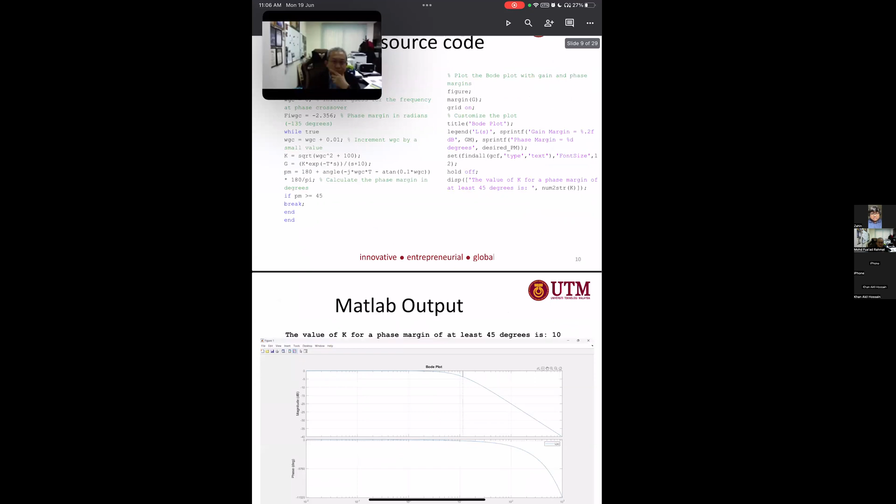So this is our group, and Rishad is going to present the first two. Akil is going to present the following ones, and I'm going to present the last one, 10.10. So we will begin with Rishad.

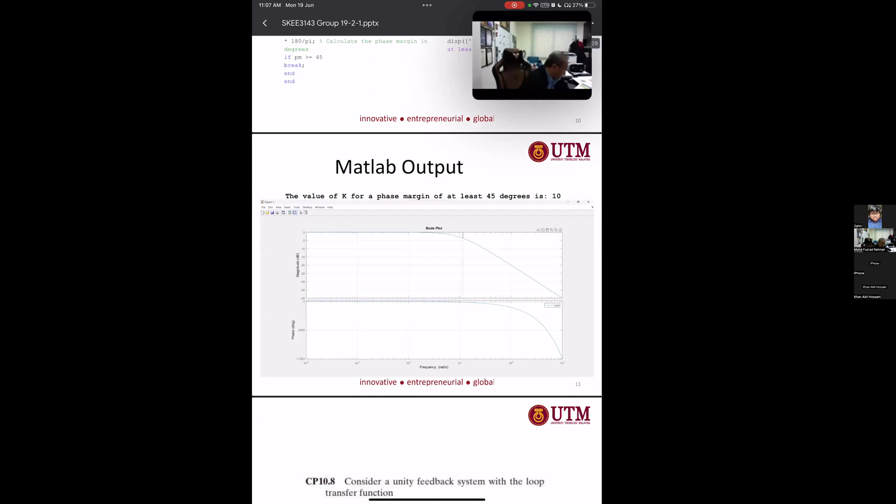Can you move my picture to the left or to the right? Or close it? Okay. Bismillah. So now we will wait for Rishad to present the first two. Rashad bhai. Actually, my PC crashed again. So, doctor, can I present from here? Yeah, sure. Okay. So, Assalamu alaikum, doctor.

We are from group 19, and our task was assignment 6. This is our first question. Here we are given a feedback control system, a transfer function, and we need to verify that the gain margin is infinity and the phase margin is 9.8 degrees. We know that for calculating the phase margin of the system, at the gain crossover frequency the magnitude of the gain of the system is equal to 1.

So we replace S in the transfer function with j omega. The first and second lines are the phase margin equation, minus tan inverse 2 omega divided by 15 minus omega squared. In the next line, we calculate the value for j omega and set the magnitude equal to 1. From that equation, we calculate omega as 12.8 rad per second, and by putting that value into the phase margin equation, we get a phase margin of 9.8.

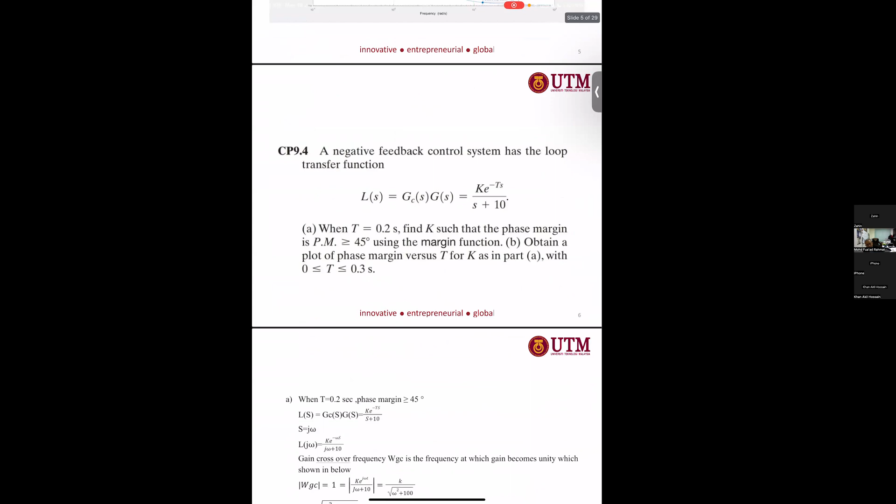Here we replace s in our transfer function with j omega, and from that we calculate the magnitude, giving one equation: k equals root over omega squared plus 100. Using the phase margin equation, we got another equation: minus omega t minus tan inverse 0.1 omega gc, where omega gc is the gain crossover frequency.

So as we have the value t is equal to 0.2 second, we just put the value here, and for the phase margin, as given, the phase margin is greater than or equal to 45. So from that equation we also got the crossover frequency for phase margin, which is minus 2.356 radians. So we got two equations, and by solving these two equations we also got another omega; the previous one was for the phase margin, and the last one is our omega. So by using those values we get the value for k is equal to 13.15.

And for the second part also, from the first part we got the equation for the phase margin, and we just put the value here, and by using this value we made a graph.

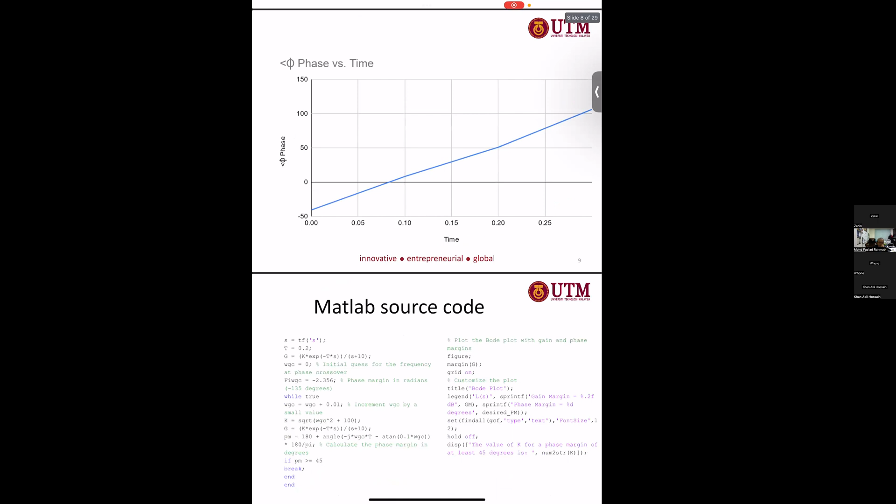Okay, so for the MATLAB, the provided code is used to calculate the gain and phase margin for the given transfer function. So here we define our transfer function by using the GS parameter, and we also initialize our values by using WGC and FLWGC, and in the while loop we increase the value by 0.01 and recalculate the transfer function G of s using the updated k and WGC. Also, it calculates the phase margin in degrees based on the shift at WGC.

And after the loop, the code plots both plots by using the functions GC, GS, and also the margin function. It includes the gain margin and phase margin lines in the plot, and then finally the code displays the calculated value of the gain that results in a phase margin of at least 45 degrees. So we can observe the phase versus time. Our observation is that in the phase versus time graph, it skews at different places. So I'm passing the next slide to my brother Akhil to present.

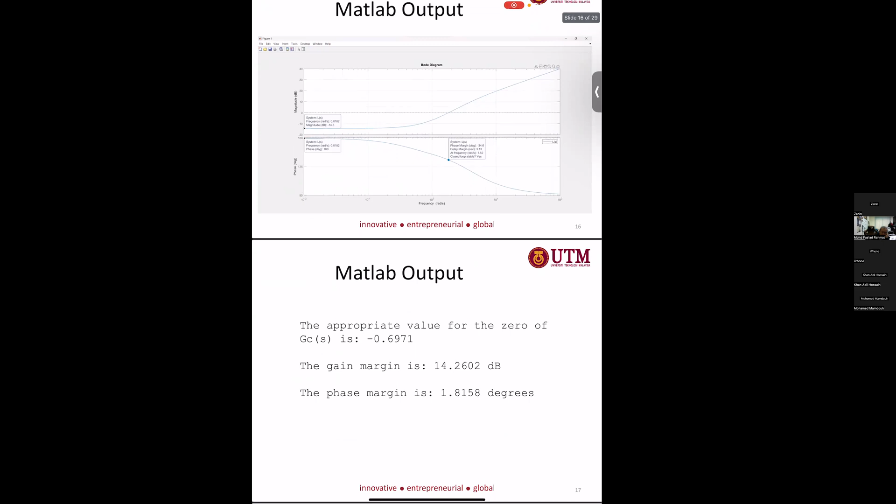I hope that's acceptable. As for the gain margin and phase margin, we have the outputs: gain margin is 14.26 decibels and phase margin is negative 34.61 degrees.

For gain margin, we get the gain crossover frequency at 0 radians per second. And for phase crossover frequency, we get 1.82 radians per second.

So moving on to our next question. Consider a circuit with the transfer function G(S) equal to the equation given, where we have a capacitor and...

Hello. Yes, we can hear you.

So for this equation, we have a circuit for the transfer function which has a capacitor and resistance. So we need to plot the frequency response.

Moving on to the manual solution, we just need to plot G(S) and nothing else. So it's simple enough.

We just replace the values of C and R in the equation, then substitute S with J omega, and then use the magnitude value to get the magnitude and the phase angle.

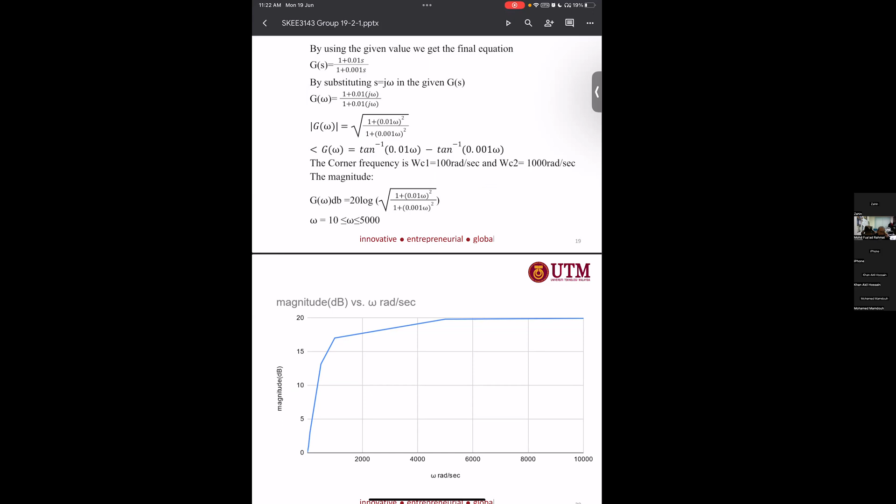For the corner frequencies, omega C1 and omega C2 are 100 radians per second and 1000 radians per second. We use these magnitudes, and by using the magnitude equation, we can get the solution for omega ranging from 10 up to 5000.

So for the next slide, we have the magnitude and the frequency response, and the phase and the frequency response.

For the magnitude, we start from 0 and go up to 5000. It keeps increasing, but after that it stabilizes, and that's the value for the magnitude.

And for phase, that's the curve. The peak phase is around 50 degrees.

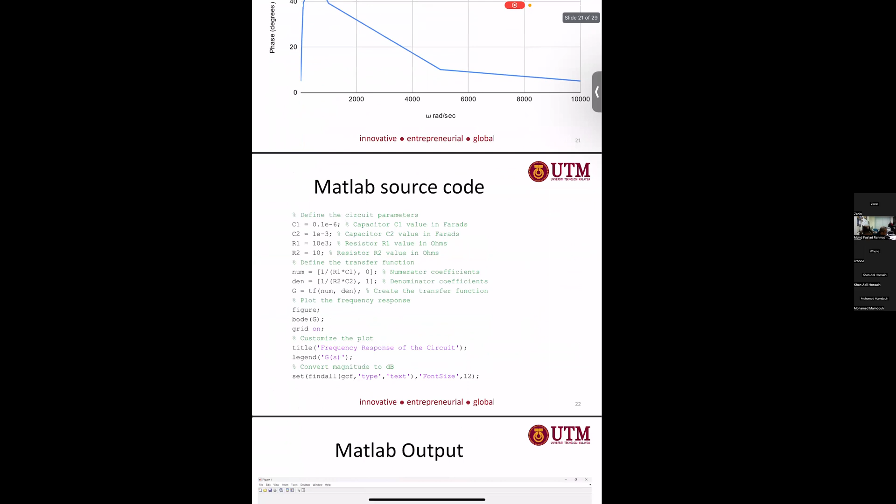Moving on is the MATLAB source code. We just need to plot, so we define the capacitor and resistor values as C1, C2, R1, R2.

Then we use the numerator and denominator coefficients and the transfer function TF, setting G equal to TF of numerator and denominator. Then we plot with G, turn on the grid, and fix the titles and so on.

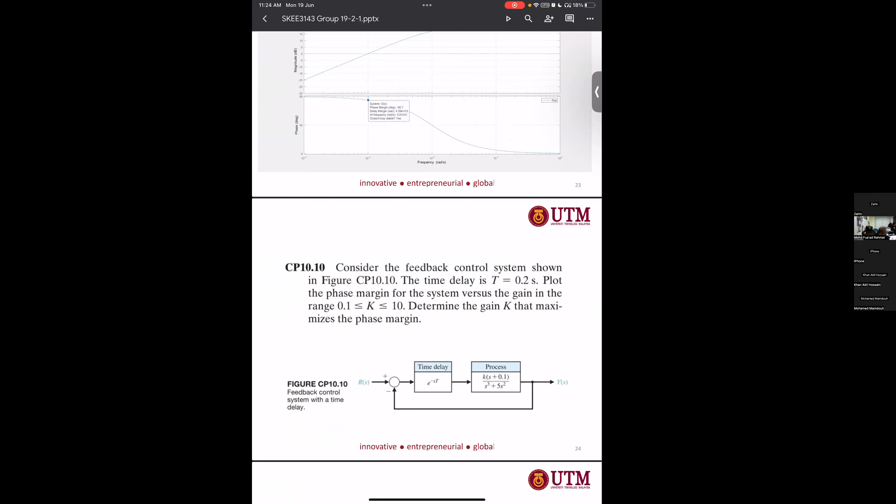The question goes: consider the feedback control system shown in figure 10.10. The time delay is t equals 0.2 second. Plot the phase margin for the system versus the gain in the range 0.1 to 10. Determine the K that maximizes the phase margin.

In the manual solution, the transfer function of the system is given, and then we replace S with J omega. When we replace it, we separate the magnitude and the phase of the loop transfer function.

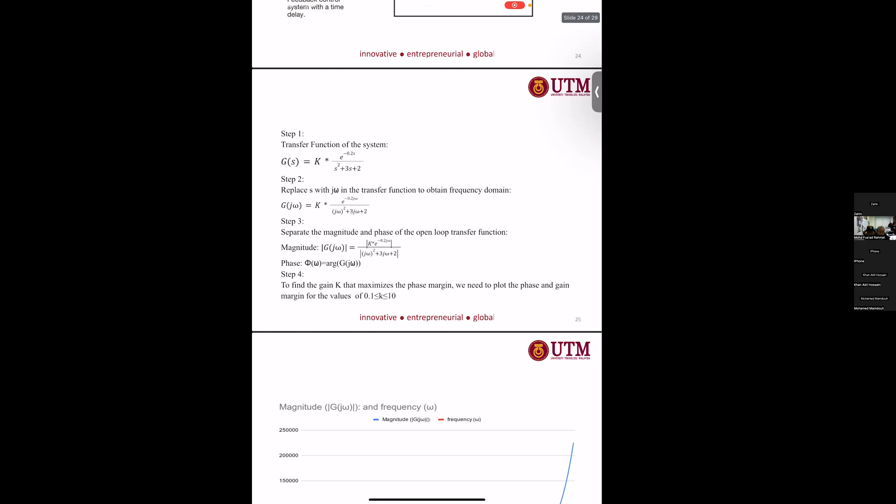And then to find the K that maximizes the phase margin, we need to plot the phase and gain margin for the values 0.1 to 10.

Professor, would you like to see the Excel file? Just browse through, okay, be quick. All right, just follow the slide.

So this is the magnitude and frequency curve, and this is the phase and frequency curve. So let me explain the MATLAB code. Why does the curve begin with phase as -1, -2, -3? It's supposed to be in degrees.

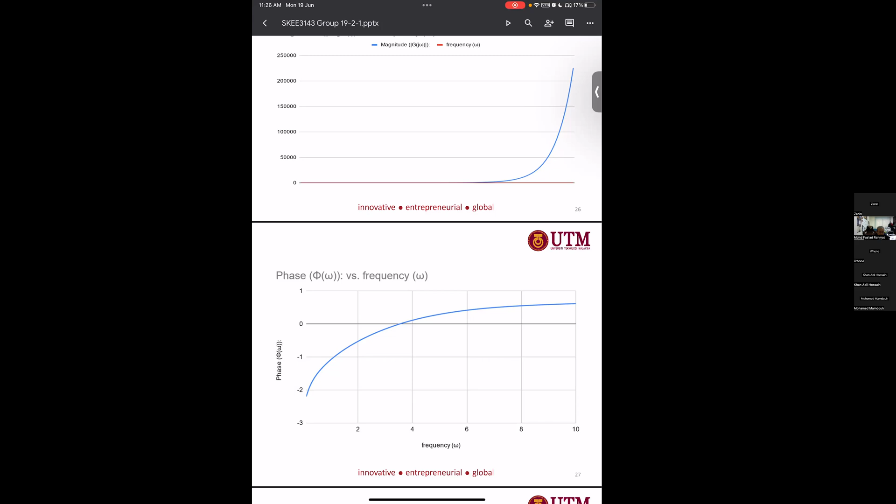I think all your Excel file is wrong because the magnitude should be decibel versus frequency, and phase should be degree versus frequency. Who plotted this? Was it Akil? I don't know.

You better check again. Yeah doctor, I plotted this one. Maybe I made a mistake. It's wrong, all your Excel is wrong. It's supposed to be magnitude in decibel versus frequency and degree versus frequency. Yes doctor, maybe I made a mistake. You take note of that.

Let me explain the MATLAB source code. The code begins with defining a range of values for the gain K in the variable k values. It starts from 0.1 and increases by 0.1 and goes up to 10.

Two variables, max phase margin and optimal gain, are initialized to store the maximum phase margin found so far and the corresponding optimal gain. The code enters a loop that iterates over each value in the k value array.

Within the loop, the current value of k is assigned to the variable k for calculation. The time delay Ts, numerator coefficient num, and the denominator coefficients den of the transfer function are also defined. The transfer function g is created using the numerator and denominator coefficients along with the specific time delay.

Next, the feedback. Should I move on to the output, or do I keep explaining the code? Next.

All right, the feedback transfer function h is set to 1, representing unity feedback. The closed loop transfer function t is calculated by applying feedback to the transfer function g with the feedback transfer function h. The code checks the stability of the closed loop system by analyzing its step response.

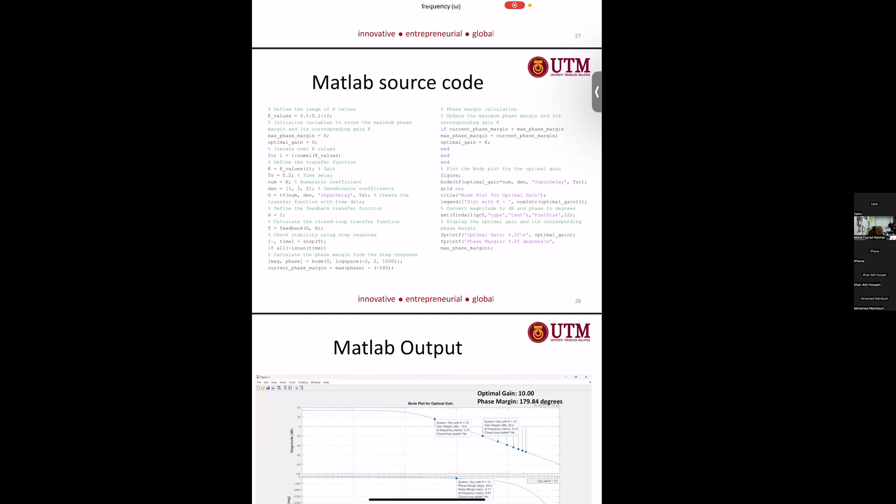The Bode plot is then generated for the transfer function with the optimal gain value, allowing visualization of the system's frequency response, which we can see in the output.

The Bode plot is then generated for the transfer function with the optimal gain value, allowing visualization of the system's frequency response. Display settings are adjusted to show the magnitude in decibels and the phase in degrees. Finally, the optimal gain value and its corresponding phase margin are displayed using fprintf statements.

Okay, finish? Yes professor. Okay, take note there. Your all Excel file is wrong. Replot again: magnitude in decibel, degree versus frequency.

I don't see any flowchart in your assignment. You show the program, but no flowchart. And then no Simulink, I don't see any Simulink file here.

So I'll give you 1 week to repair your slide and submit by this Saturday. Thank you professor for the extension, doctor. This Saturday, thank you professor. Thank you, the rest is wrong so you have to take note.

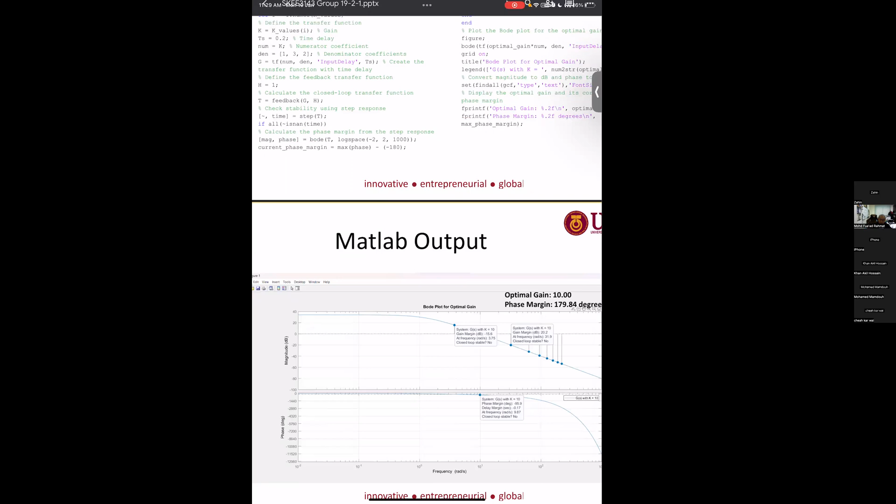Rashad, what is the comment? Yes doctor, what is the comment? My comment? Your comment. What, you should know very well. Number 1, all Excel file is wrong, redo again. Number 2, yes doctor.

No flowchart in the report and slide. Number 3 is Simulink, no Simulink. Your Excel file all is wrong, so you have to repair again. Yes doctor, my annotation is wrong. Your assignment is failed, because information is wrong.

Okay, you may exit now. Okay doctor, we'll fix. Okay, okay, let the brothers enter. Thank you professor. Thank you. Assalamualaikum. Assalam.

Okay Mamdo, get in. Muhammad Mamdo, Osama Mamun. Yes doctor. Chia Kawi, wait, we have the time delay because... Asha, you can go out.

Asha, leave meeting, I don't know where Osama is. I WhatsApped him but he's not responding. Asha, leave meeting because other people want to share. So doctor, currently is it group 18 or group 17? You wait Chia, I will call you. Okay okay, because this Bangladesh group has a lot of time delay, okay. Pasha, bye, leave meeting.

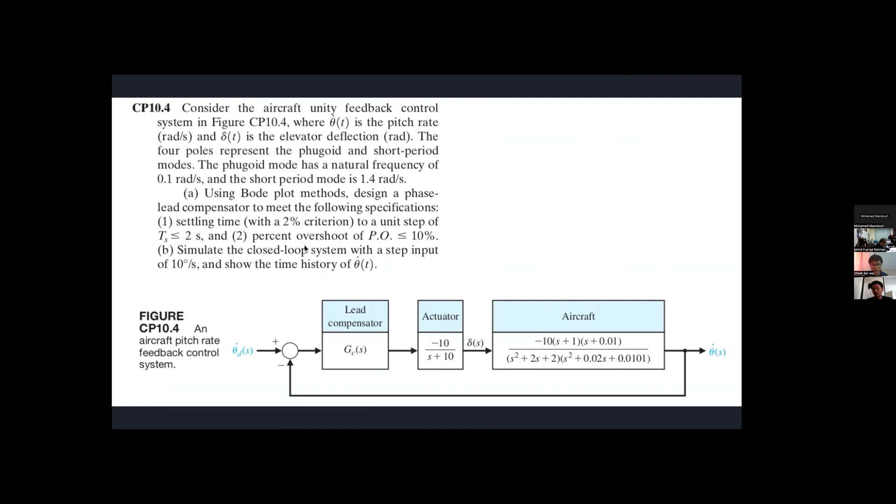Okay, proceed, proceed. So we start from the first question. This question asks us using the Bode plot method to design the phase-lead compensator with a settling time of 2 seconds and percentage overshoot of 10%.

So my first step is to determine the gain, then the target phase margin. After that I obtain the gain margin and phase margin from the Bode plot. Then I calculate the additional phase, and from the additional phase I can determine the value of beta. Then from the Bode plot I can get the value of the gain crossover frequency.

So with the value of beta and the frequency, we can calculate ZC and PC. Here I calculate the gain assuming the ESS is less than 2%. Since this is the unit step response, ESS equals 1 over 1 plus KP. After the calculation, the K is around equivalent to 10.

Then from the graph of damping ratio over the overshoot percentage, I can get the target damping ratio. Then from the graph of phase margin against the damping ratio, I can get the target phase margin, which is 58.5 degrees.

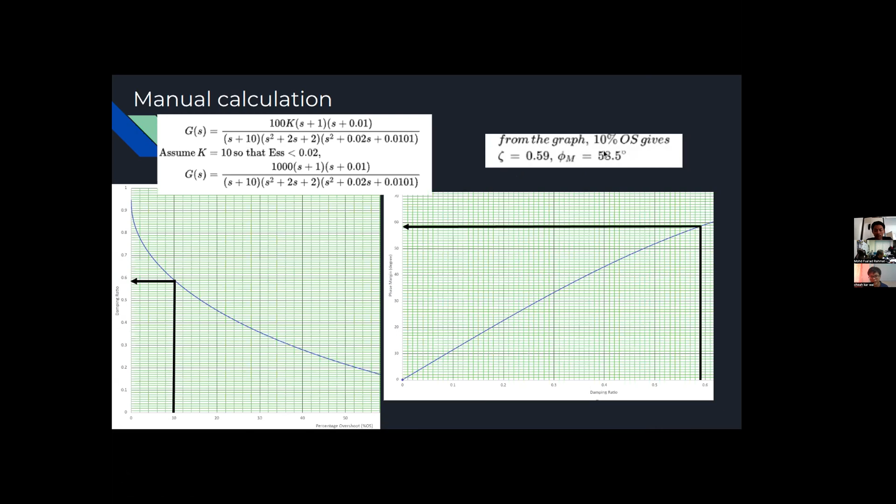So here is the uncompensated Bode plot. From the Bode plot we can get the original gain margin and phase margin - where the frequency cuts at 0 dB is the phase margin, and where the phase cuts at 180 is the gain margin. After calculation, the phase margin is around negative 34 degrees and the gain margin is 18 dB.

So we calculate the additional phase, which is 100.2 degrees. Then by using the formula, we can get beta of 0.012.

From the beta, we can get the maximum magnitude of the phase lead compensator, which is 19.208 dB. Then from the Bode plot it's around 20 radians per second.

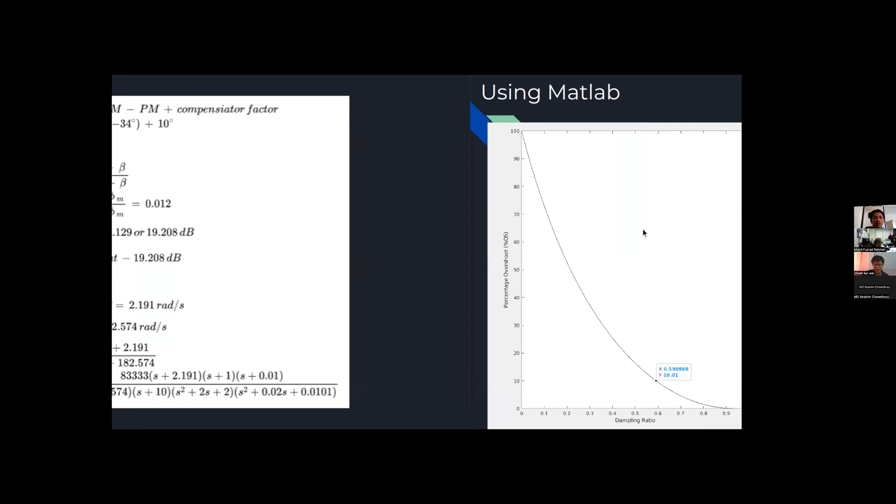So now it's processed using MATLAB to prove my answer. In MATLAB I also plot the graph of percentage overshoot against damping ratio, and the phase margin against damping ratio graph. From the graph, the damping ratio and phase margin is almost equivalent to what I found from the graph in Excel.

Same, yes, here is phase margin 58.5 and damping ratio of 0.59. What I get from Excel is the same.

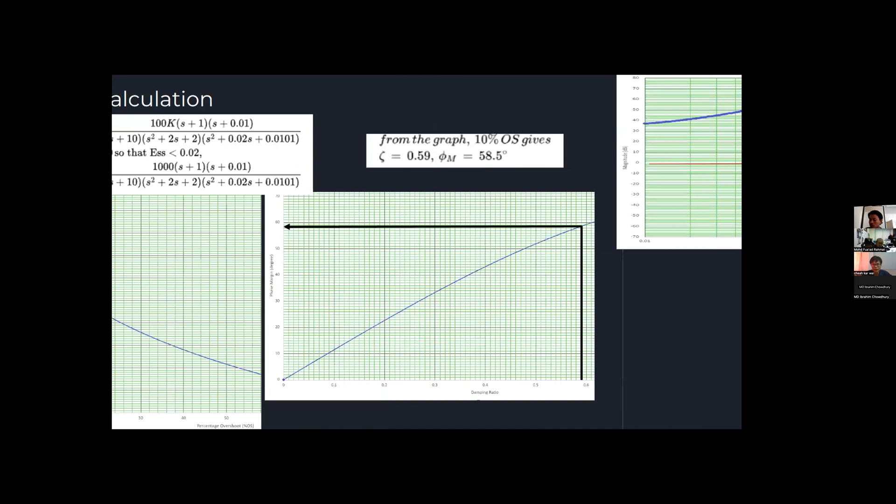So from the Bode plot, by using MATLAB I get the phase margin and gain margin. Then put the value from MATLAB and calculate until I get this value. Why plus 34? Oh here, the phase margin is minus 34. Minus minus becomes plus.

Okay, betul? Razin, betul tak? Betul lah tu. Kau kat mana ah, yang sayup-sayup? Bilik tu tu.

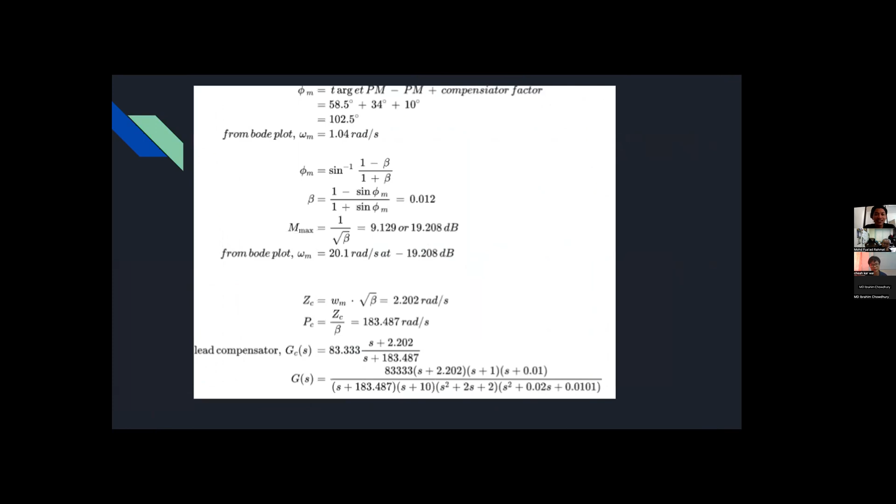Okay, okay. So I can see it. Is this here?

It's almost the same. So, okay, here comes the second section of the question: we need to plot the time response of 10. Okay, step response of 10. So the first graph is the uncompensated system, the middle one is the compensated system using manual calculation, and the third one is the compensated using the MATLAB calculation.

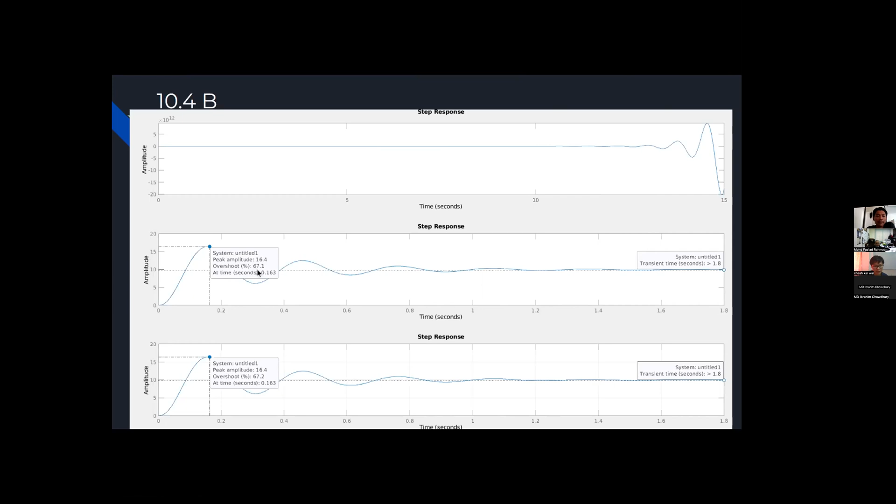So from the bottom two graphs, we can see that the transient time is almost at 2 seconds, and the overshoot is 67%. Discussion. So from this question, it seems that the transfer function is successfully reduced to 2 seconds, but not sure why the overshoot did not reach the target, which is 20% overshoot.

All right. Next. Okay, next. Be quick. Next is Razin. Yes, okay, present. So Razin, do you want to share your slide or just continue my slide? You want to present? No. I mean, this is your presentation part. So the slide, I continue sharing screen? Okay, share. Okay. You cakap je, dia control.

Okay, question 10.6 is about the lag compensator: we need to design a lag compensator using the root locus to meet the following specifications. The first specification is steady state error must be less than 10% for the step input, the second is phase margin must be greater than 45 degrees, and the last is settling time, 2% criterion, less than or equal to 5 for the step input.

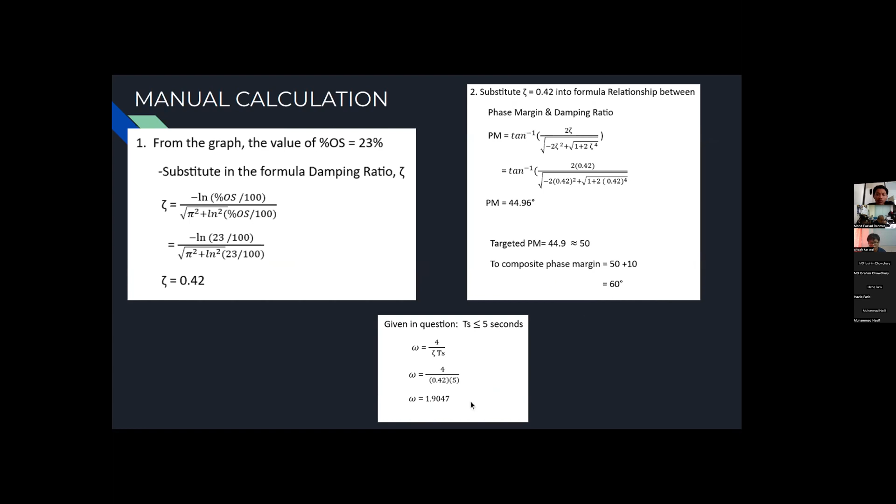Next, for the manual calculation, we substitute the percentage overshoot equal to 23%, and we get the same value as the graphical method. Then we substitute the damping ratio into the formula relating phase margin and damping ratio, and we get the phase margin equal to 44.96. Then we compensate the phase margin and get 60 degrees. And for the frequency, we get 1.9047 to run the coding.

Okay, for the steady state, the question states that steady state error must be less than 10%. We calculate using the formula of steady state error type 0, which is steady state error equal to 1/(1 + Kp), giving Kp equal to 9. The Kp compensated must be greater than 9, so we choose Kp compensated equal to 10 to include inside the MATLAB code.

For the Kp uncompensated, we get it from the root locus, and the value is 5.18 when the damping ratio equals 0.42. So we can calculate the ratio for the compensator, and we get 1.737.

So from the locus, we can assume the value for the ZC to create the equation for the compensator. So we must assume ZC equal to 0.5 because the first pole is near to the origin. Then we substitute into the ratio equation, and we will get the value for the PC. And then we can create the compensator equation, which is GC equal to 10 (S plus 0.5) over (S plus 0.2879).

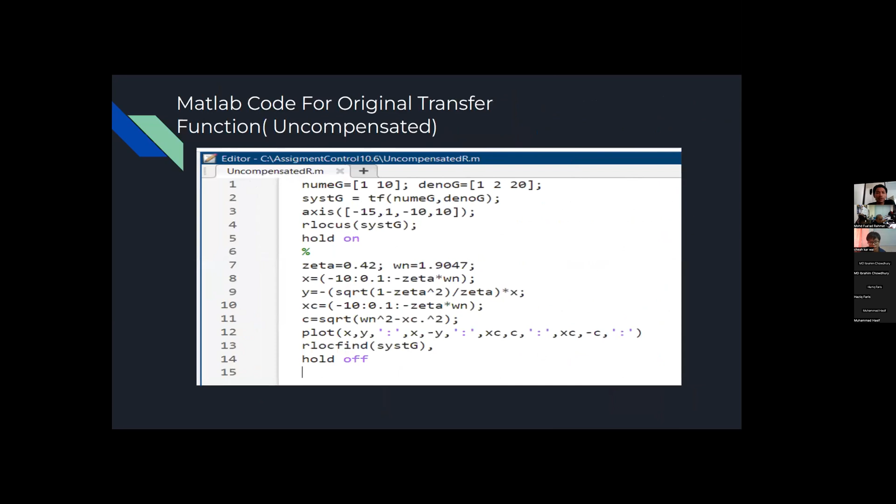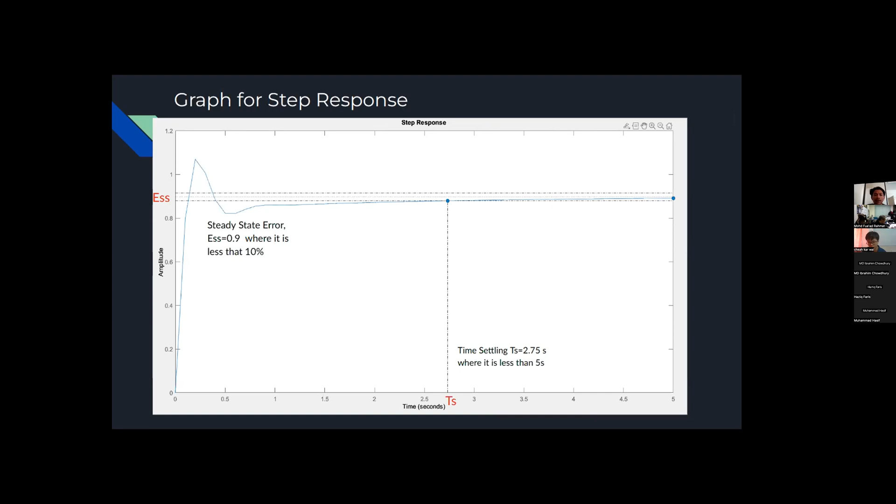Okay. For discussion, a lag compensator can improve stability and performance. It enhances stability by reducing oscillation and preventing system failure. From the assignment, we can see that the compensator increases the damping, reduces oscillation behavior, and improves the transient response. Settling time is also improved, allowing the system to reach the desired value more quickly. The lag compensator increases the phase margin and gain margin, reducing the risk of instability and making the system more stable. However, the need for the compensator depends on the system specification, characteristics, and performance required.

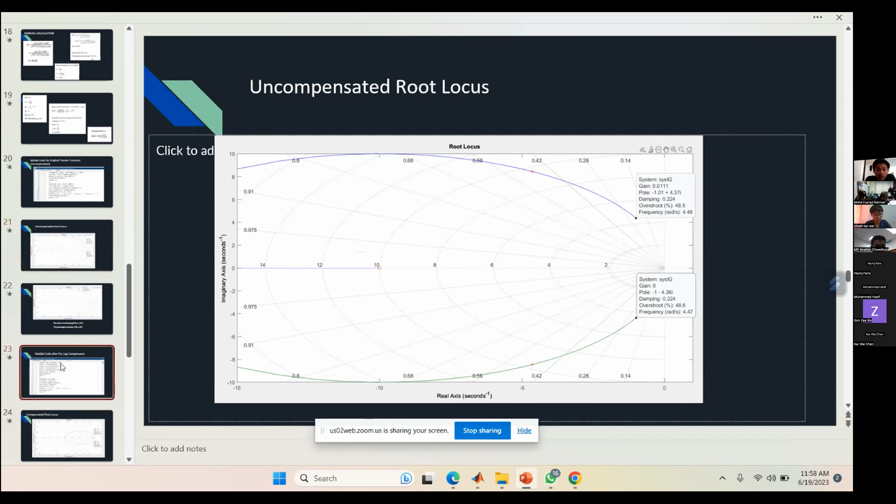And this is the code for the second coding for our compensated root locus. Here also we did the same according to the numerator and the denominator, and multiplied the transfer function to find the second numerator for finding the transfer function from open loop to closed loop system, and here we also use the zeta and omega and the same values.

And finally, when we plot the graph, this also remains the same. The root locus damping ratio and the overshoot also remain the same as the previous one. And in both parts there are no changes in the frequency response also, so it remains the same, 4.47.

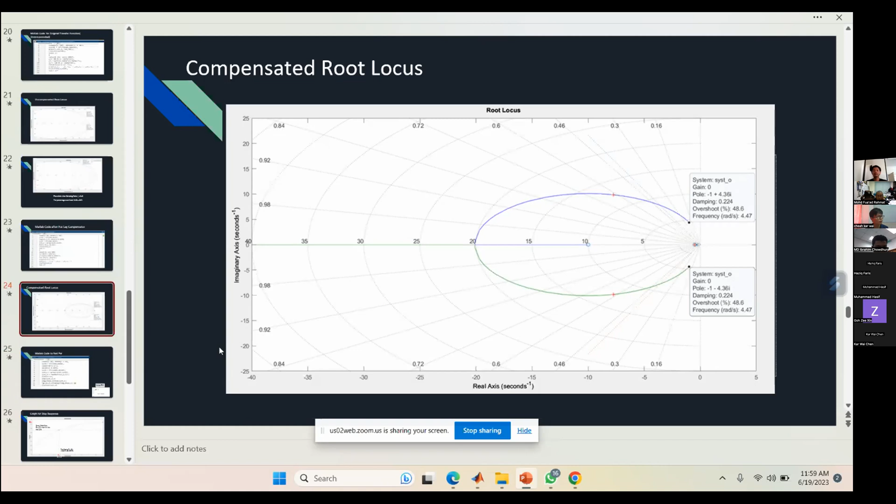And this is the code for question C to find the phase margin. Everything remains the same as the previous code. We just plot the phase, magnitude, phase margin and omega to find the Bode plot and the unit step response. And here we use the SISO tool, single input and single output tool, to plot the phase margin and the step response also.

So here we got a steady state error of 0.9; as given in the question, it should be less than 10%. It remains 0.9. And when we plot the graph, the settling time is 1.88 seconds, which is less than the given 5 seconds from the question. And when we plot the Bode plot, we find that the phase margin is 62.3 degrees at a frequency of 13.7 radians per second.

Another thing, doctor, when we plot the phase magnitude and phase margin, we didn't get through the 180 degrees, and we only have a limitation until -135.

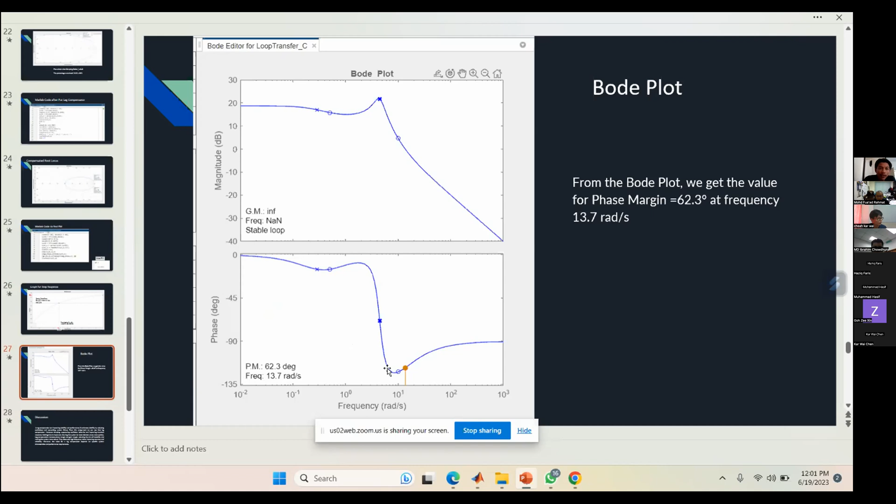You're late. No, Doctor, we already submitted, but we keyed in the wrong group number. Huh? We keyed in the wrong group number. Why? We wrote 14, not 16. So 14 hasn't submitted yet. I don't know, Doctor. Sorry. Okay, so wait, Doctor.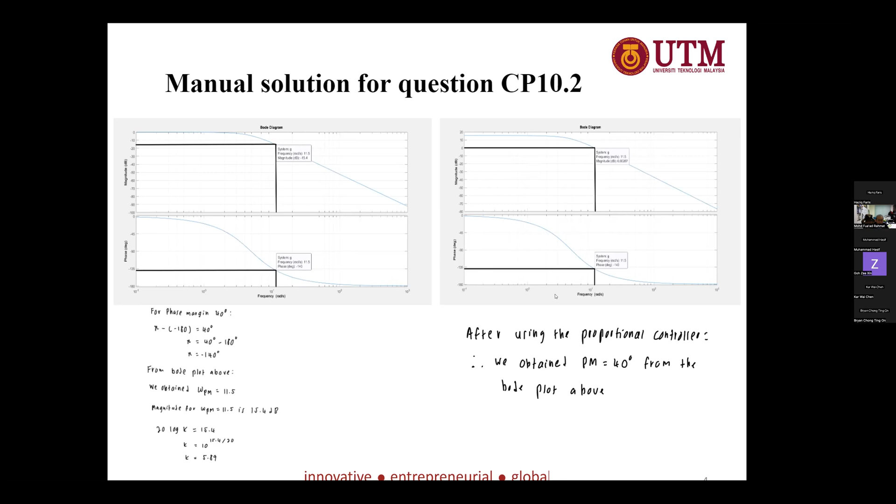Dah? Hello, dah? Okay. No. We continue to question 3.

So we continue to question 3. For question 3, we had a hard time solving the question, to be honest. So we just did our own calculation. Hopefully it satisfies you, Doctor. So for the... pardon, Doctor? Last minute. Oh yeah.

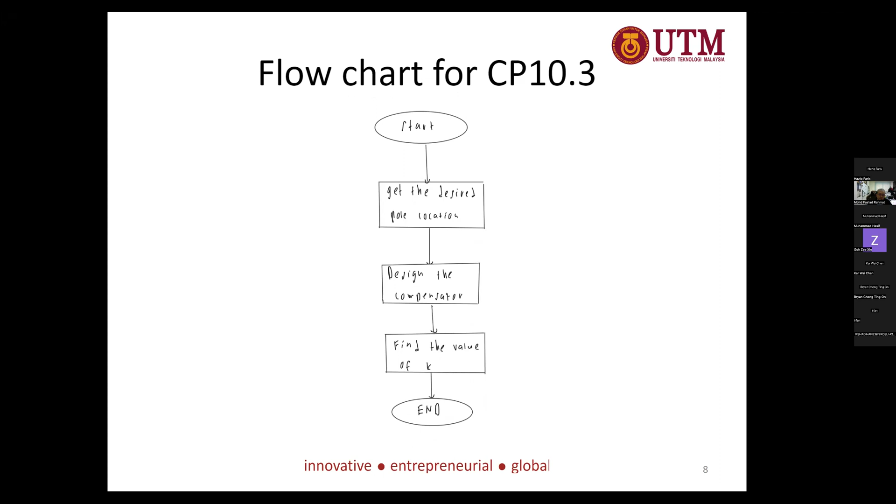And this is the flowchart for question 3. First we get the desired pole location, which we assume is -4, then we design the compensator, and lastly we find the value of k, where we assume the value of k is 100. Okay, this is the MATLAB source code for question 1 and question 2.

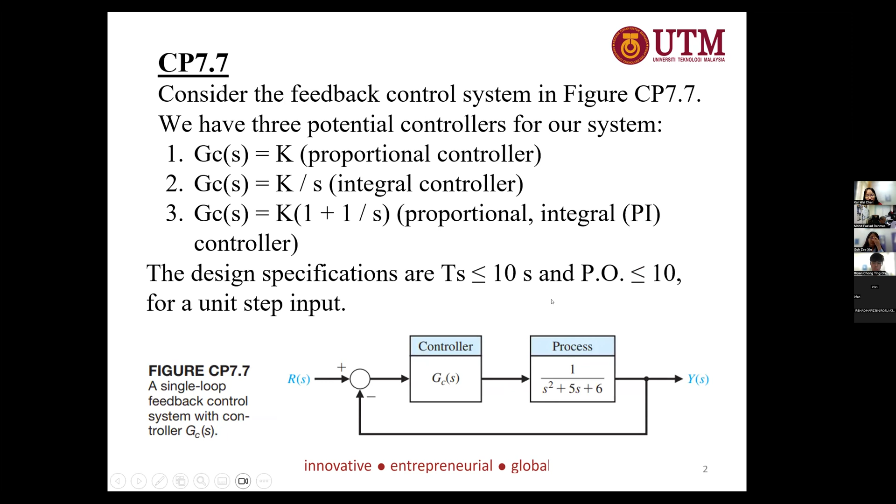There are 5 questions in this question. For the first one, we need to develop a root locus for K from 0 to infinity and determine the value of K so that the design specifications, the above two, are satisfied. For part B, we repeat the same thing using the integral controller, and the third time using the PI controller. For question D, we need to plot A, B, C in terms of transient response, which is the unit step response for the closed loop system. And for E, we need to compare and contrast these 3 controllers obtained in parts A to C.

Next, this is a flow chart of how we do question 1. We begin with plotting the root locus and determining the theta value. Then we find the range on the real axis, calculate the range of K, check with MATLAB, and check if K is valid with the calculation. If it's not valid, we need to debug again. If it's valid, we check until all 3 controllers are done. If not done, we do this again. Once the 3 controllers are done, we plot all the transient graphs and compare them.

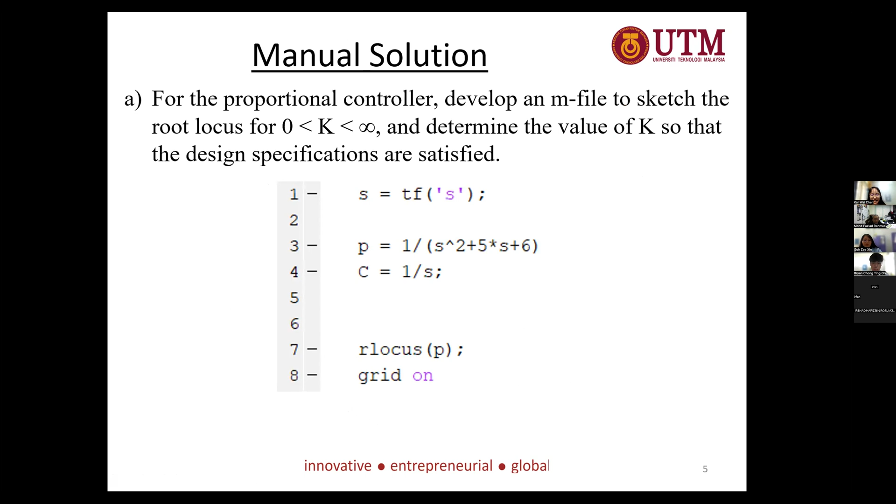For the first question, we are doing the P controller. This is the MATLAB code. Because we cannot draw the root locus by hand, we need to plot it in MATLAB. So the manual solution is the same as MATLAB; we need to plot it. You can see this P, and the P controller is this. Next, this is what we plotted from MATLAB.

Next, there are 2 specifications. The first one is OS less than or equal to 10%. When we draw this, we find that zeta is around 0.591. So if OS is less than or equal to 10%, zeta must be greater or equal to 0.591. Then the theta is less than or equal to 53.77. From the second condition, the TS value: TS is less than or equal to 10. After working on this, we get that the real value must be greater than 0.4.

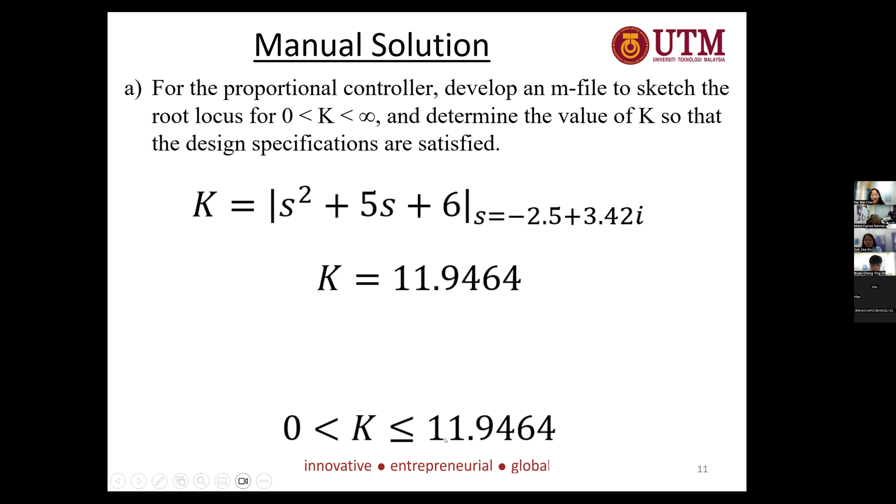Then the second ratio is 0.4. You can see from 0.4, there's no line, so every point here is valid. From our calculation, we take the maximum point here and substitute it in our equation. We find that K is lesser than 11.9464, meaning K is greater than 0 and less than or equal to 11.9464. So this is the manual solution.

And then for the MATLAB solution, it's basically the same, but this time we only take the point. We slide through with the mouse and find that the point here is 11.9. This is the Excel plot, so it's the same thing, meaning K is greater than 0 and less than or equal to 11.9.

So let's look at part B. This time we are doing the integral solution. This one is the MATLAB code, and this is what we draw. Again we have the two conditions; this is the first one, same as part A, giving theta less than or equal to 53.77. This is the condition.

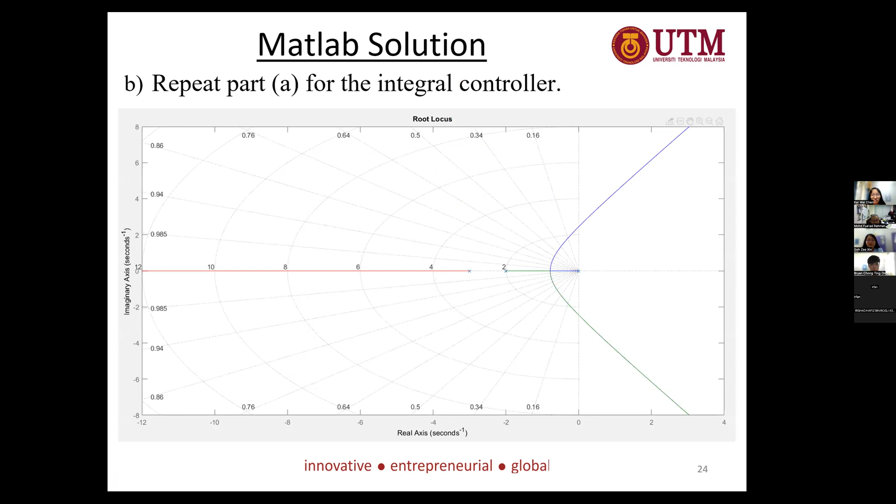So when we plug it all in, K is greater or equal to 1.664 and less than or equal to 4.45. For the MATLAB solution it's the same, but this time we only scroll through with the mouse. This is the Excel plot, and what we get from here is 4.44 and 1.67, so the conclusion is 1.67 to 4.44 for K.

Now for part C, using the integral controller, the MATLAB plot is shown below. This is the same first condition, and then the second condition of 0.4. This time, when 53.77 is drawn, you can see there's a limit from here. Since the 0.4 is at something here, this equation has been cut into half.

And the gain from here is 0, here is infinity, so that means there's a limit here. When we plug in through the equation, we find that the limit is 2.77 until the maximum of 10.04, yeah. So next, when we do the MATLAB solution...

This is the Excel graph. This time we are using the mouse to check. The point shown here is 2.77 until the maximum of 10. So this is our conclusion for the MATLAB.

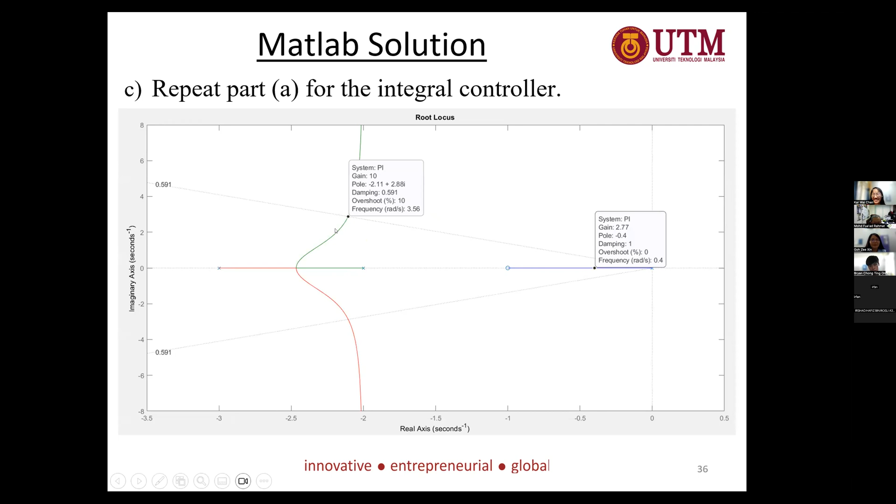Is there any way from the MATLAB code to get the data? For Simulink, yes, but for MATLAB, no.

It's not smart lah. The way you collect the data is not smart.

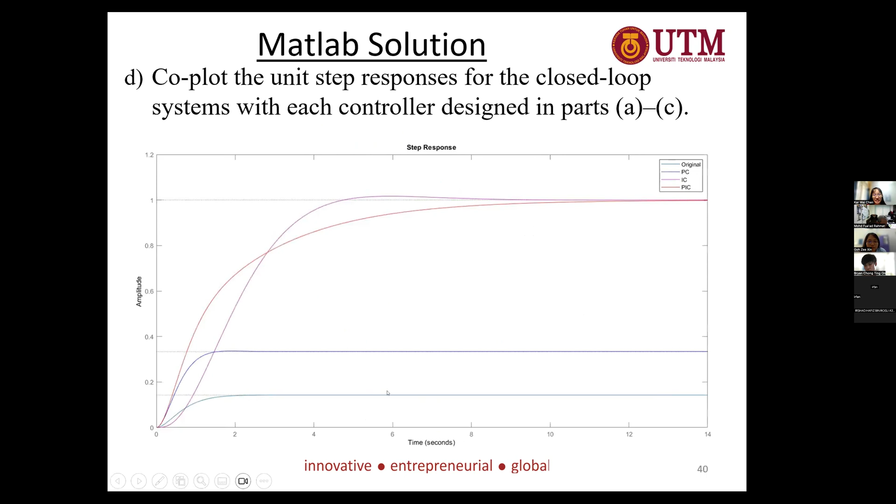Next, this one is the Simulink version, so we basically get the same thing. From the Simulink, we can take the data and then plot it in the Excel file.

So this one is the solution to get the ESS. This is the manual solution. Basically you just find the KP first, and then you find the ESS. This is for the proportional controller, integral controller, and PI controller.

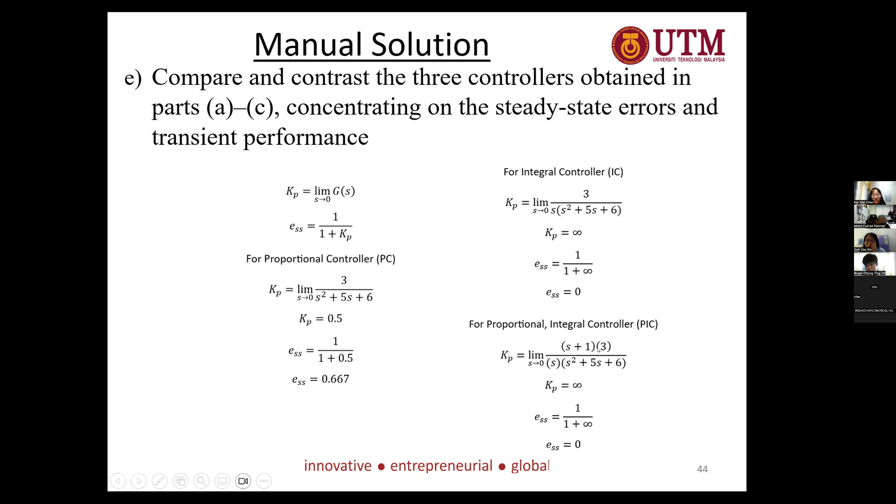Okay, so this is our discussion for question 1. The P controller has the quickest rise time and settling time, but has the highest steady state error. The I controller and PI controller eliminate the steady state error. The I controller has a percentage overshoot.

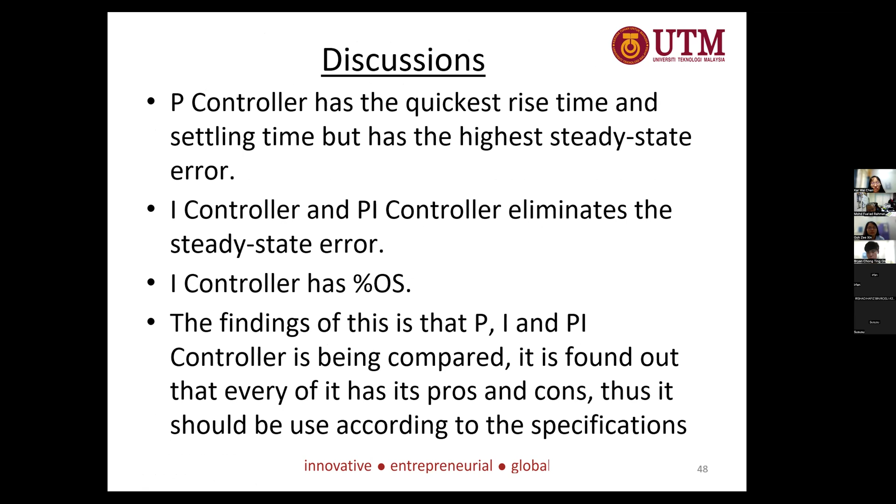The findings are that the P, I and PI controllers were compared, and it's found that each has its pros and cons. Thus it should be used according to its specification. PID might be a better choice as the D controller serves the purpose of minimizing the transient error. The combination of the PID controller can be used to control magnitude and phase problems. And this is the conclusion for question 1.

The effects of applying the P and PI controller have been successfully seen. Okay, next. Next.

Okay, can you hear me? Faster.

Okay, so I will be in charge of CP 7.8. Consider the spacecraft. So we need to find the controller, which is a PD controller. We need to develop a file to find KD over J and KP over J for this question.

And with the settling time TS smaller than or equal to 4 seconds, and the overshoot smaller or equal to 10%, we need to use the 2% criteria to determine the settling time. Next, determine... no, not determine.

Okay, Determine. Basically, this is the flow chart of the question.

First we sub the KP over KD into the equation, and then we find the poles and zeros for the system. Next, we plot the root locus at MATLAB by assuming the damping ratio, the overshoot is 10%. So we find the damping ratio and theta, and then we plot the straight line on the root locus.

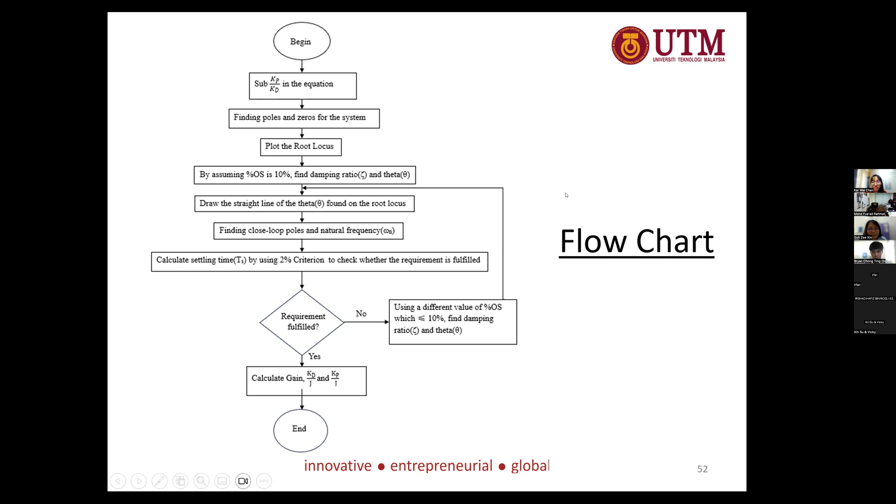So we will sub the 5 into the equation, so we can find the transfer function for it. Then we can know the system type is type 2, the pole is 0 and the zero is -5. So we will assume the percentage overshoot is 10% and 0%.

Previous slide. I think you can access control because Kawai has access the control. Continue. Oh wait, I cannot control.

So first, the percentage overshoot is 10%. So we find the damping ratio from the percentage overshoot and damping ratio graph. We can find the damping ratio is equal to 0.591, so the theta is 54 degrees.

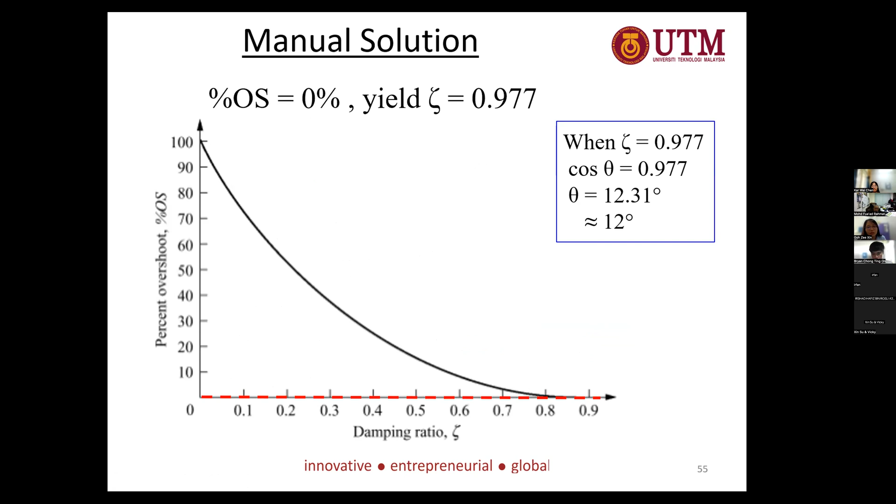Next, we will assume the percentage overshoot is equal to 0%. So the damping ratio is 0.977 and the degree is 12 degrees, which we plot in the root locus.

So this is the root locus. The closed loop pole is -9.55 plus 2.06 J, and the natural frequency is 9.77 radian per second.

By using this closed loop pole, we can also determine the settling time by using the 2% criteria. So the settling time is 0.42, so the requirement is also fulfilled.

Then we can find the gain by using the formula by subbing the closed loop pole into our equation. So we can find the gain, and KD over J and KP over J.

So we can conclude that the KD over J is in between 6.96 and 19.1, and the KP over J is between 34.8 and 95.5.

So this is the MATLAB source code, and N is equal to the numerator, and D means the denominator. So we plot the root locus and plot the zeta line. This is the zeta line, and we use sgrid to plot the zeta line.

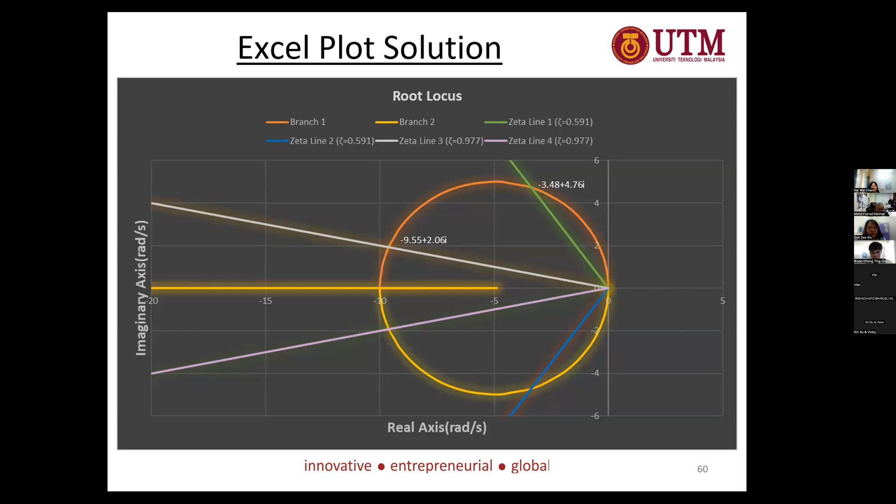This is the Excel plot of the root locus. Then this is the Simulink solution, and this is the Simulink waveform for the time response of the second order system. Then this is the Excel plot from the Simulink which we merged to the Excel.

So for the discussion, we can observe that the KD over J is in between 6.96 and 19.1, and the KP over J is in between 34.8 and 95.5.

So if we want to increase the value of the gain, meaning KD over J and KP over J, we can use a low percentage overshoot. From the root locus, we drag the mouse, and we can see when the overshoot decreases, the closed loop pole will become different.

So when we sub the closed loop pole into the equation, the gain will increase.

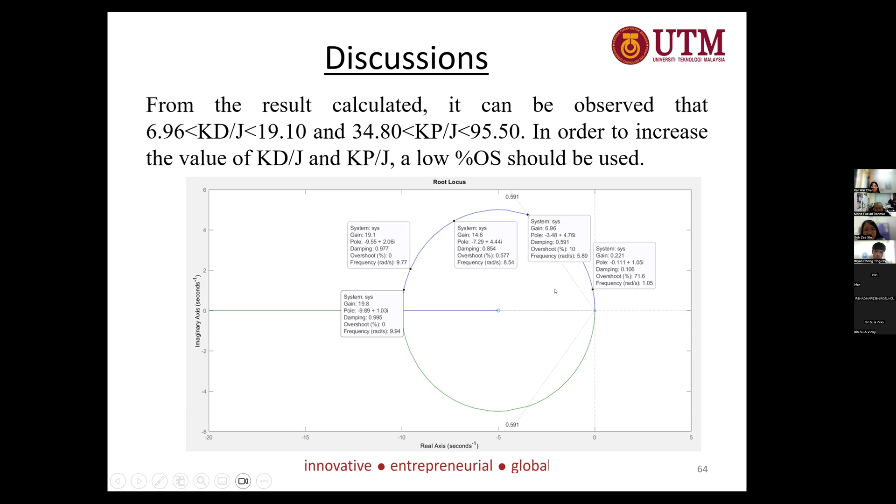Next. So the conclusion is the specification of the PD controller, smaller than 10% overshoot and settling time smaller than 4 seconds, are achieved. So the values of KD over J and KP over J are accepted.

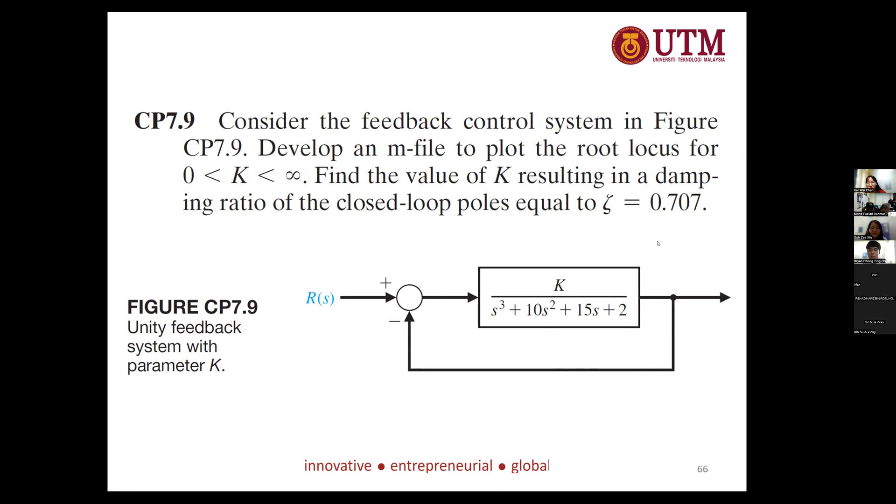Okay, so we have to get the angle of the damping line, the zeta line. So it's 45 degrees. And because I don't have the graph, I just directly use the root locus in MATLAB to get the dominant poles, which is -0.817 ± j0.818.

So in the manual calculation, I sub the dominant poles into the equations to find the gain. Sorry, to sub the dominant poles into the open loop poles equation, the open loop pole length. So we can find that K equals 9.16 from the manual calculation.

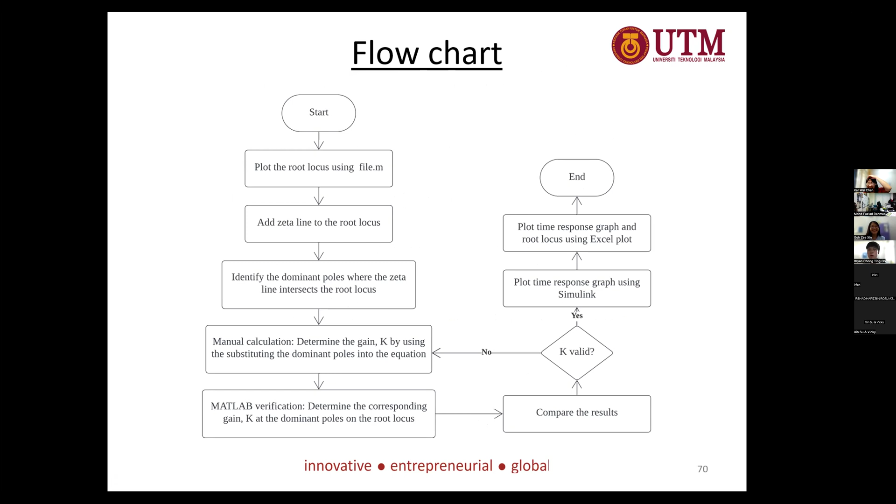So this is the flow chart. We have to plot the root locus using an M-file first. And then we add the zeta line to the root locus, identify dominant poles, and then get the K using manual calculation. Then we verify it using MATLAB and compare the result. If it is not valid, then repeat again. If it is valid, we continue to plot the time response graph using Simulink and Excel plot.

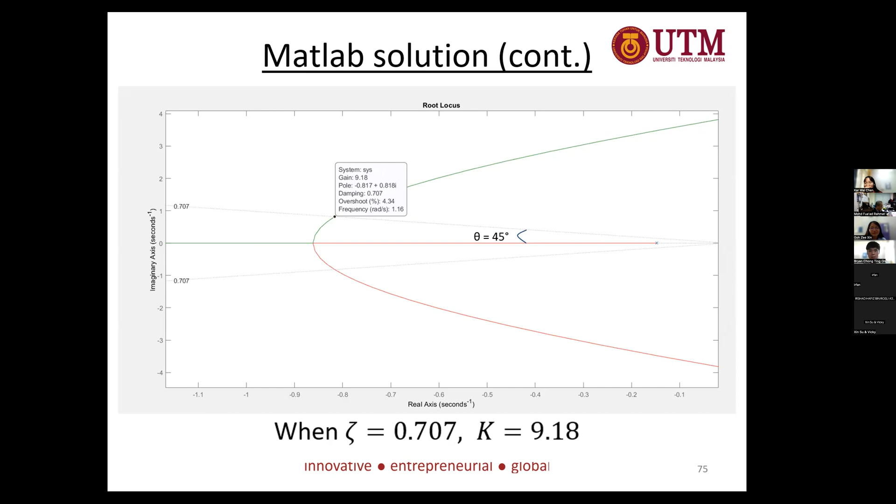So this is the root locus plot with the zeta line, and we can find the values of the dominant poles where the zeta line intersects the root locus. So we can verify that the gain is 9.18 at the dominant poles of -0.817 ± j0.818. Okay, this is the root locus plot in Excel plot.

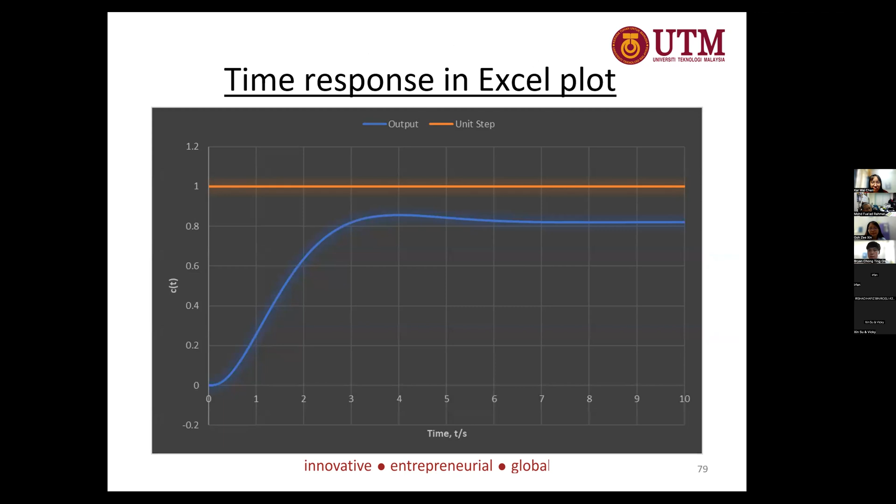So in the discussion, the gain K is verified already, it is acceptable. For the time response graph, you can see that the steady-state error can be improved further. And the transient response, such as the settling time, we can also improve further. So we can come up with a short summary that the PID controller can be used to enhance the overall system performance.

And the conclusions are similar to the discussion. The gain value is identical, it is acceptable. And for the time response, we can further enhance it by using a PID to minimize the steady-state error and to improve the transient response. And that's all from group 15.

Yeah, okay, I have nothing to comment. Very good slides. I want to know, email to me how you transfer from Simulink data to Excel. That's all. Yeah, we have the Excel files included in the zip file. Oh, in the zip, everything is there. Okay. Corresponding person is Brian Chong.

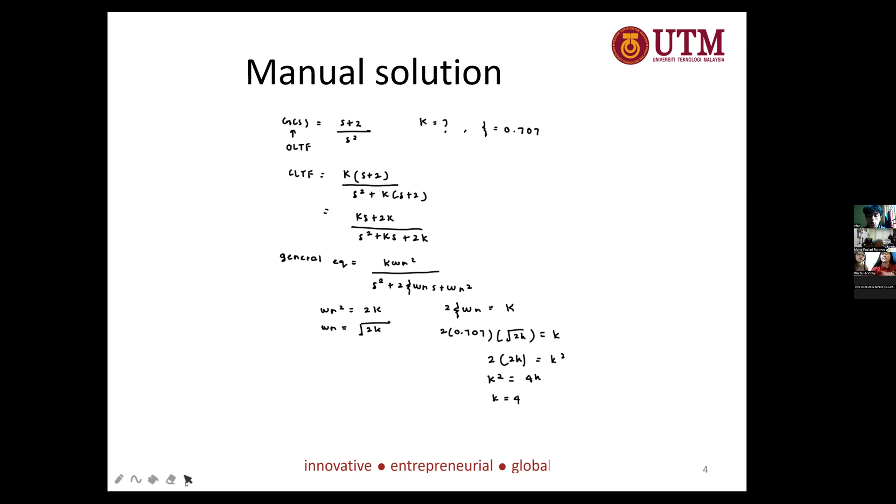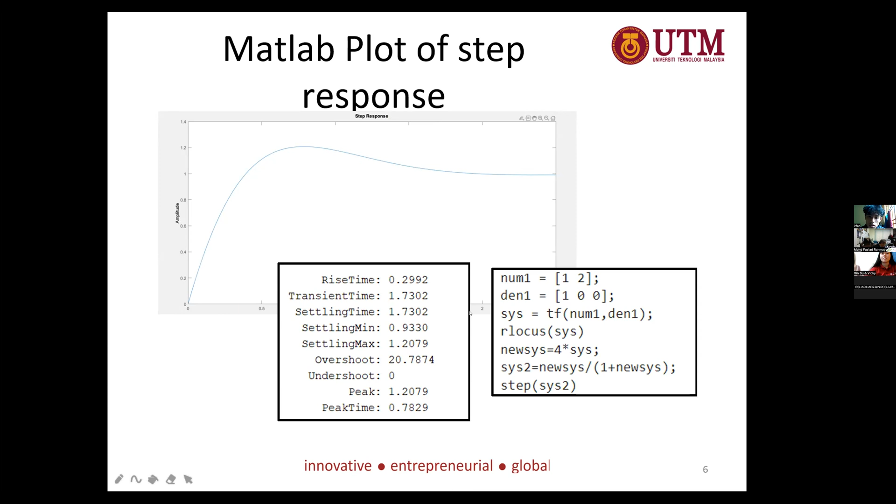As for the step response, this is the source code for the step response, which is the closed loop one with the gain. We also observe the parameters of the step response through the MATLAB code. Next is the Simulink. The Simulink is for the closed loop transfer function with the gain, and we did a comparison between the parameters from Simulink and MATLAB.

Next, this is the flowchart for answering question 1. The first step is manual calculation, then writing the MATLAB code for verification. We move the mouse to find the damping ratio for verification and compare with the calculation. As the values are the same, we proceed to generate the step response of the closed loop system in MATLAB, and implement it in Simulink before exporting the data for plotting in Excel.

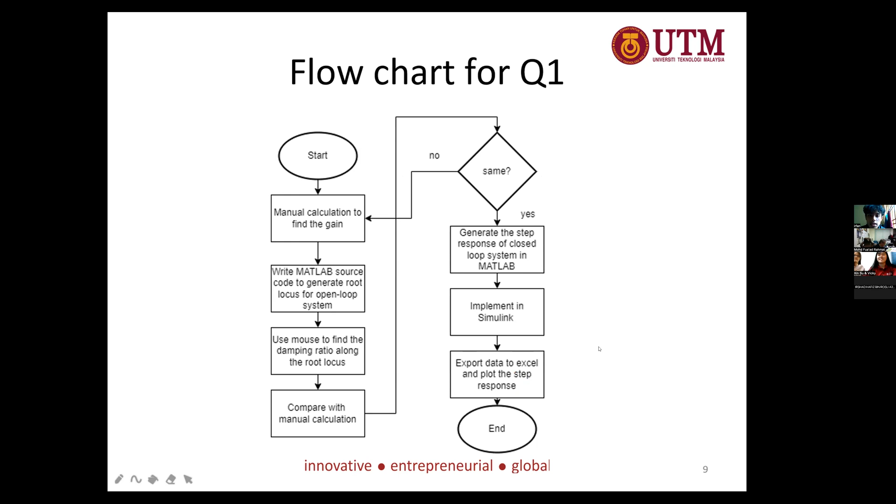So a bit of discussion. Basically, I just reiterate the point that I have successfully obtained the gain at a damping ratio of 0.707, with a gain value of 4. For MATLAB and Simulink, by observing the parameters, we can see that the response shapes are the same, and most of the parameters are the same, but some parameters are different, which are the settling time and the rise time.

A possible explanation is a numerical issue caused by the simulation step size in Simulink. MATLAB will be the more exact, more accurate one. In Simulink, the step response is evaluated in time steps, so if we use the default simulation parameters, these step times could be larger than necessary to accurately describe the behavior of the system. So basically the time parameters in Simulink will be larger than those in MATLAB if we use the default settings.

Next. So that's all. Next question.

That's all for question 1. I pass to my group member for question 2.

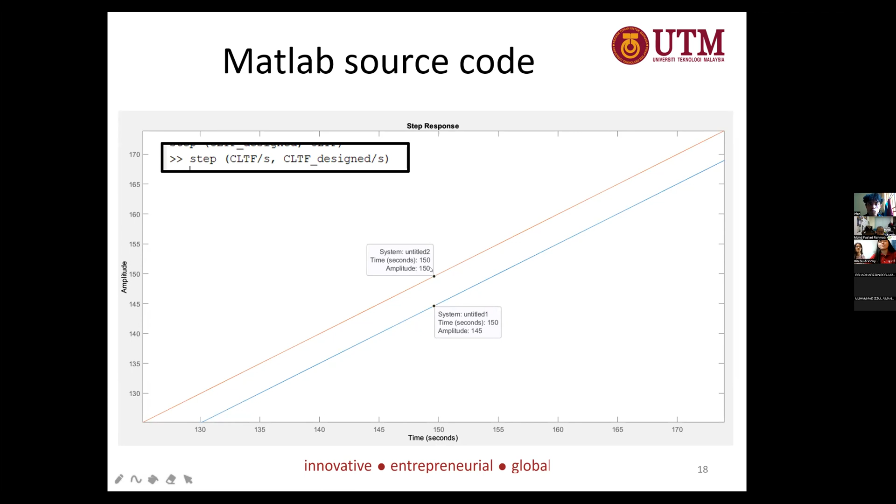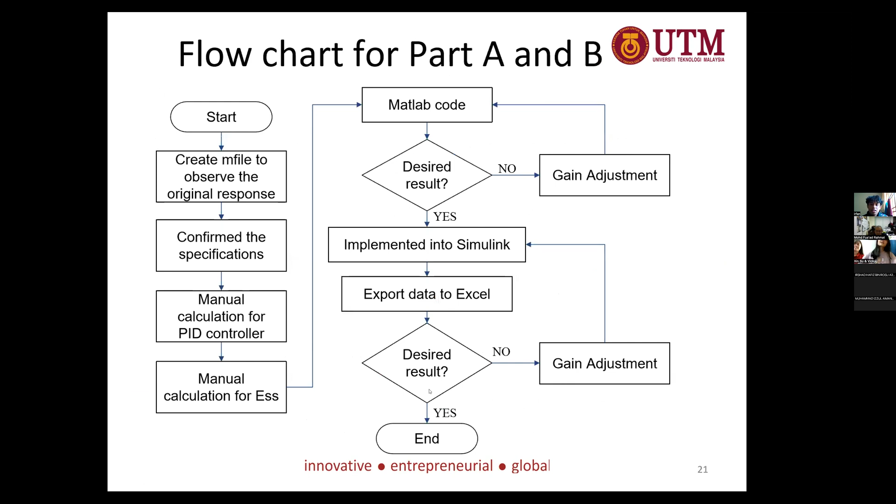Now we're moving for the question. Continue. Tak nampak. Kamera tak nampak. Camera? Part C of question 2. Nampak hidung ni. Nampak hidung. Tak nampak mata. Continue.

So this is the part C of question 2. We use the same system, but this time we need to determine the effect of disturbance as here. So what is the effect of disturbance TD(s) on the output Y(s)? So first of all, we use manual calculation for part C. We assume the input R(s) is 0 first, and then find Y(s) over TD(s).

So we redraw the block diagram and simplify it. We can find this one, TD(s) as the input, and then we calculate it and simplify it. Eventually we'll get Y(s) equal to minus TD(s) over GC(s). So that means to minimize the effect of TD(s), we should increase the denominator, the gain of the PID controller, to reduce the effect of the disturbance on the output.

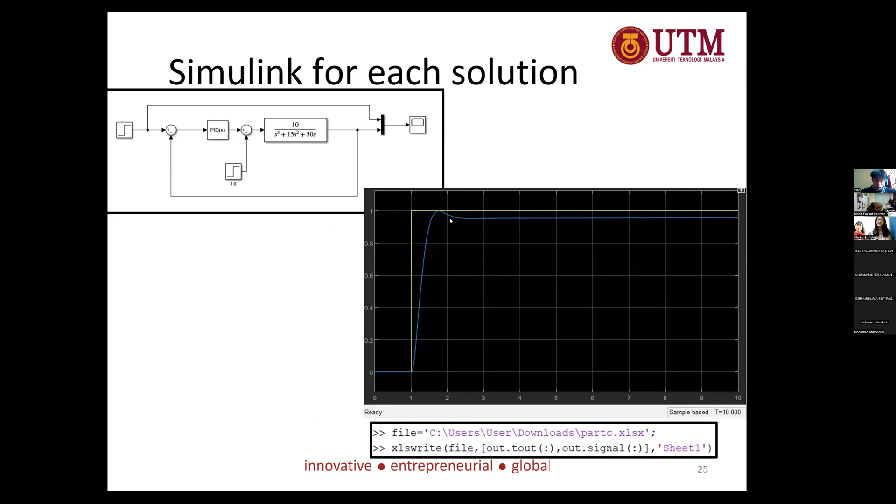So from the result, I compare with the system without disturbance. So we can find that the disturbance will increase the system error. So the final value of the system will not approach it when the time goes to infinity. To improve this problem, we should increase the gain of the PID controller.

For the conclusion of our project, the gain of Q1 is found, and it can be proved and corrected by MATLAB and Simulink. And then the target of improvement of the system in Q2 has been achieved. And then we also analyze the relationship between the disturbance and the output performance. Okay, so this is our research.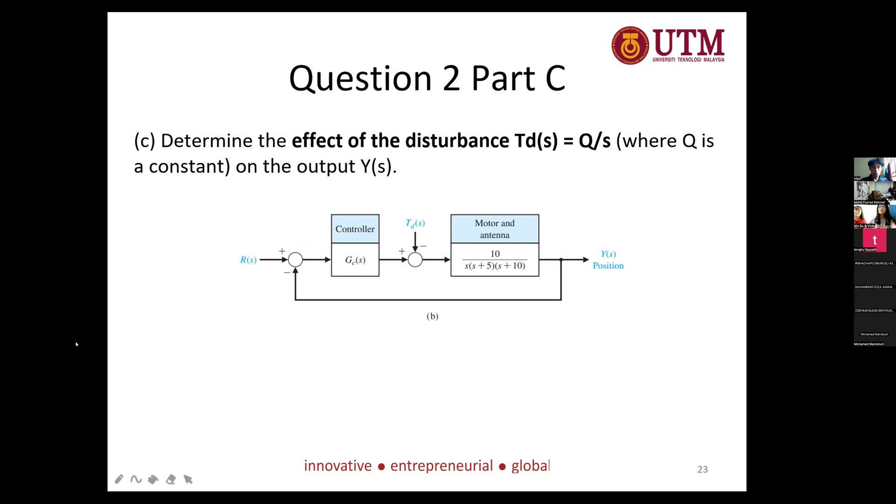Question, Ms. Chong. Yes. What is a real life example of disturbance in your system? Real life of disturbance. Real life examples. Your system is an antenna control system, right, Vicky? Yes. So what is a real example of disturbance? I use this as an example.

Like this antenna, we want to transmit the signal, and then within the antenna there may be some noise, internal noise inside it. So this is the disturbance. Internal noise, for example, thermal noise. Thermal noise.

Other than that, I think maybe the surrounding environment, like rain and winds, may also affect our satellites. This one is outside of the satellite. Rain, heavy rain. Strong wind. Yeah. Lightning. Irfan? Yeah, it can be. Any more examples?

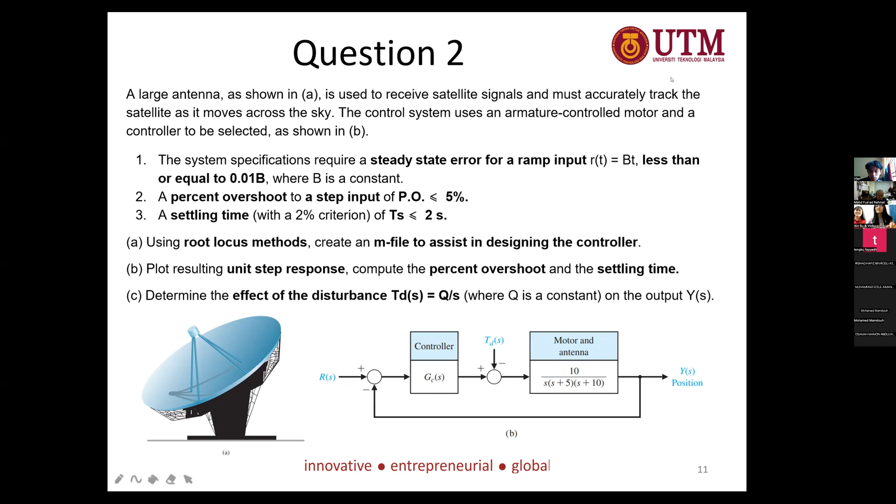Okay, group 14 can exit. We give way to group 13. Okay, thank you, Doctor. Thank you, Prof. Thank you, Prof. Group 13, come in. Hello. Okay. Can you hear me, Doctor? Hurry up a bit. Don't read. Elaborate.

Alright. Okay, Assalamualaikum warahmatullahi wabarakatuh. Today we are from group 13, going to present our assignment, which is assignment 1. This is the first question, CP 7.1. Using the root locus function, obtain the root locus for the following transfer function when the gain goes from 0 towards infinity. For question A, the transfer function is 25 over s cubed plus 10s squared plus 40s plus 25.

The flowchart applies to the whole CP 7.1 because there are 4 questions. Firstly, we write the MATLAB code in an M file for the given open loop transfer function, then we run the script and it displays the root locus. Only then do we do the manual calculation for the breakaway point, asymptotes, and the jω crossing, and then sketch the root locus.

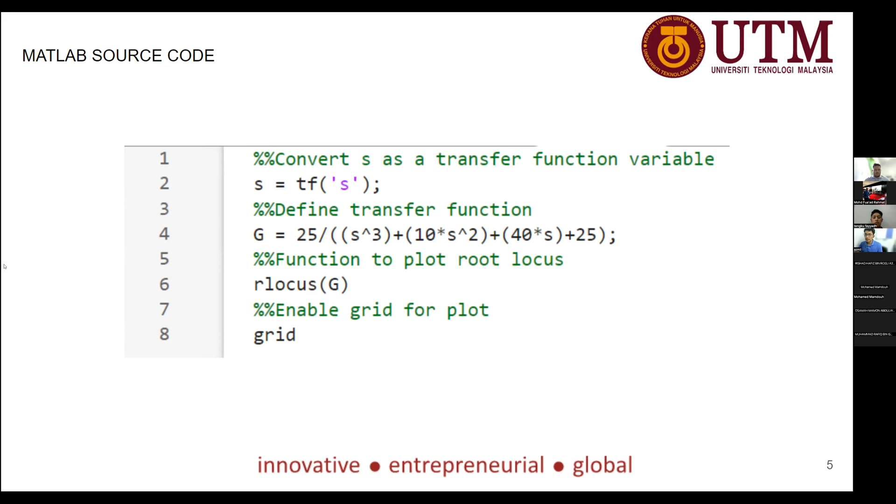As you can see here, the MATLAB root locus plot is similar to the manual sketch, including the jω crossing and the system maximum gain. So for question CP 7.1a, the result is validated.

Next, for question CP 7.1b, the open loop transfer function is G(s) equal to s plus 10 over s squared plus 2s plus 10. The question asks to obtain the root locus using the rlocus function. For manual calculation, the open loop zero is -10 and the open loop poles are -1 plus j3 and -1 minus j3. To find the breakpoint of the root locus, we differentiate the open loop transfer function and set it equal to 0.

So the breakpoint of the root locus is -19.4868. To find the corresponding gain K at the breakpoint, use the formula K equal to 1 over the modulus of GH. From the sketch, the root locus begins at the finite and infinite poles and ends at the finite and infinite zeros.

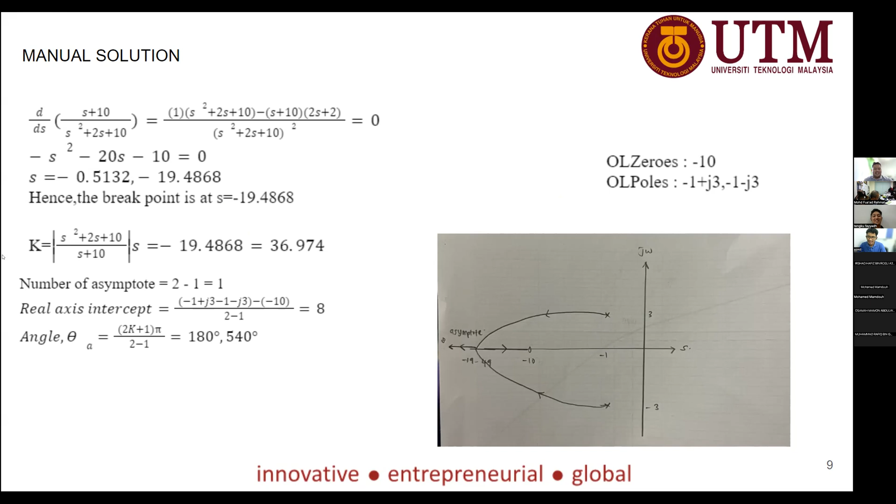Here is the MATLAB source code to generate the root locus. Next, here is the result obtained. As a conclusion for this question, the sketched root locus and the root locus generated by MATLAB are equal, so the result is valid.

Next, for question CP 7.1c, the given open loop transfer function of the system is G(S) equal to S squared plus 2S plus 4 over S multiplied by S squared plus 5S plus 10. The question asks to obtain the root locus using the rlocus function.

For manual solution, we obtain the open loop zeros as -1 plus j1.73 and -1 minus j1.73. And the open loop poles are -2.5 plus j1.94, -2.5 minus j1.94, and lastly 0.

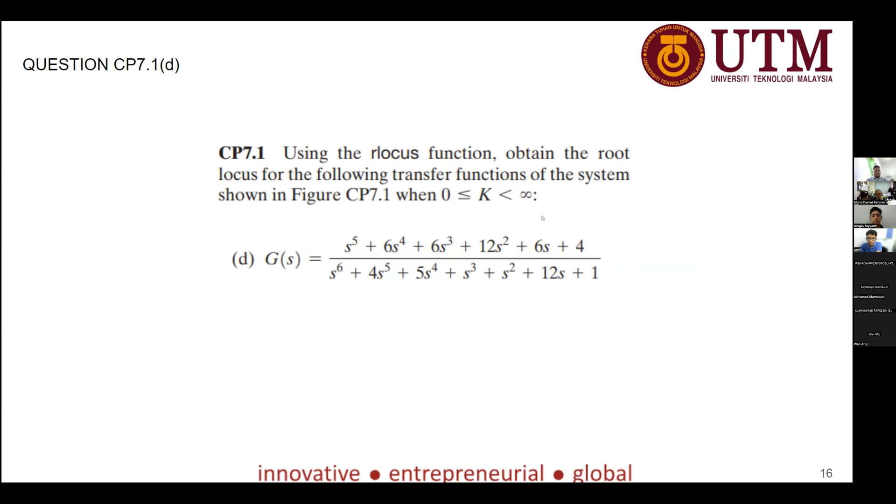Using manual calculation, we get 5 open loop zeros: -5.2568, -0.3086 plus minus j0.9387, and the last one is -0.063 plus minus j1.2281.

No need to read it all. Just mention open loop zeros, open loop poles. Sudah dikatakan, jangan jadi pembaca berita. Ringkas saja, kalau tidak nanti lambat habis.

For open loop poles, we get 6 open loop poles. For this function, we cannot get the breakpoint because when we differentiate the open loop transfer function, we get the root locus of S to the power of 10, and so we cannot find the breakpoint or solve it.

The number of asymptotes we get is 1, the real intercept we got is 2, and the angle for this transfer function is 180 and 540.

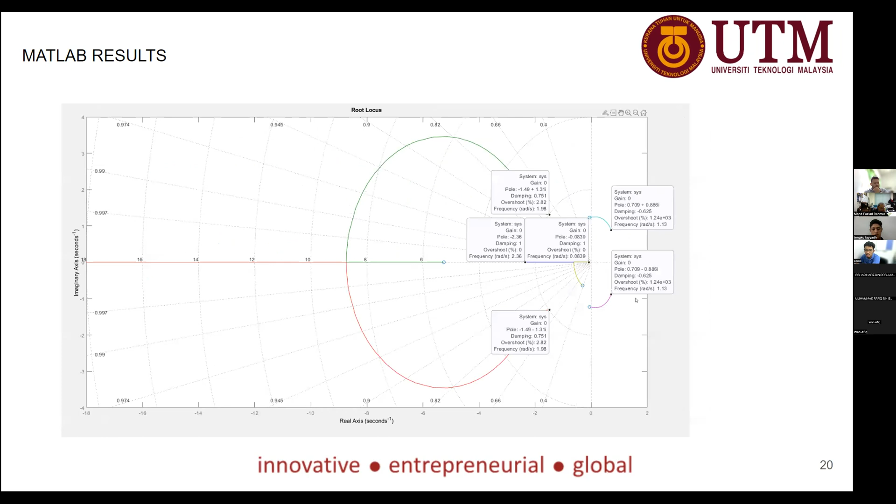Next, for the MATLAB source code, this is the code for this transfer function, and this is the resulting root locus. We can see there are 5 zeros and 6 poles in the root locus.

For the discussion part, we observe that higher order transfer functions are generally more complex and harder to analyze compared to lower order ones, because we cannot solve the equation for finding the breakpoint. We also find that systems with a finite number of zeros in the left half plane tend to be more stable compared to zeros in the right half plane.

For the suggestion, we consider model reduction techniques to reduce the order of the function, and we need to explore advanced control techniques suitable for higher order systems. For improvement, we need to add zeros in the left half plane to shift the root locus direction into a more stable region.

Next, for question CP 7.2, the given open loop transfer function of a unity negative feedback system is KG(S) equal to K(S squared minus 2S plus 2) over S multiplied by (S squared plus 3S plus 2). The question is to plot the root locus via MATLAB and also use the rlocfind function to show the max value of K to be stable.

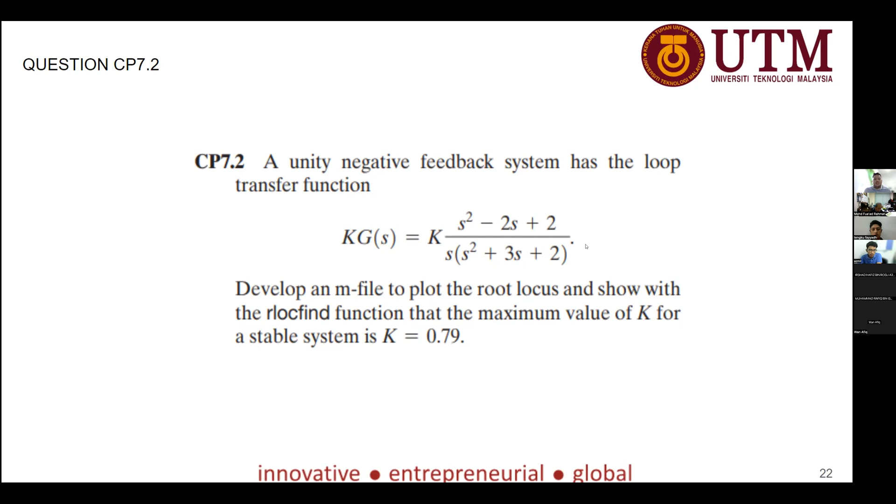From the manual calculation, we use the Routh-Hurwitz table to find the j-omega crossing, which separates the stable and unstable operation. The first step is to find the characteristic equation from the closed loop transfer function, then find the gain K at a row of 0, and forming the polynomial with K equal to 0.7913.

So hence the range of stability is K greater than 0 and less than 0.791.

Here is the flowchart to explain each step of the solution. Write the MATLAB code for the given open loop transfer function, display the root locus, and then using the rlocfind function, we can find the K critical at the jw crossing, then do the manual calculation.

Here is the MATLAB code source, and this is the result obtained. Lastly, we managed to find K using the rlocfind function as shown in the slide. So I can conclude that the K critical from manual calculation is the same as the K critical from MATLAB.

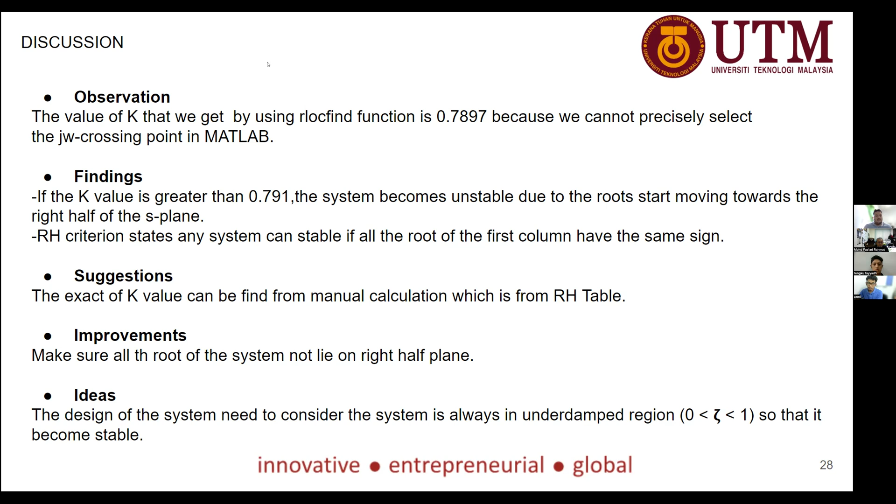For CP 7.1 and 7.4, we are given a unity negative feedback system, root locus GC(S)G(S). We need to develop an M-file to obtain the root locus as P varies from 0 to infinity, and then find the P for which the closed loop pole is stable.

This is for manual calculation. First, we find the characteristic equation using 1 + GC(S)G(S) = 0. Then we recalculate and get the function 1 + P(S-1) over S squared plus 5S plus 10 equal to 0. This is the open loop transfer function.

From the open loop transfer function, we form the closed loop transfer function to find the characteristic equation for the RH table. From the RH table, we get the range of stability for closed loop poles, which is 10 minus P must be greater than 0. Calculating, we get P must be less than 10. So the range of stability for closed loop is from 0 to 10.

This is the flowchart for this equation. First, we find the characteristic equation, then determine the range of P for stability of the closed loop. Then we write the MATLAB code using the OLTF, display the root locus, and compare the value of P from manual calculation with MATLAB. If the results are similar, we end; if not, we recheck the manual calculation to find the value of P.

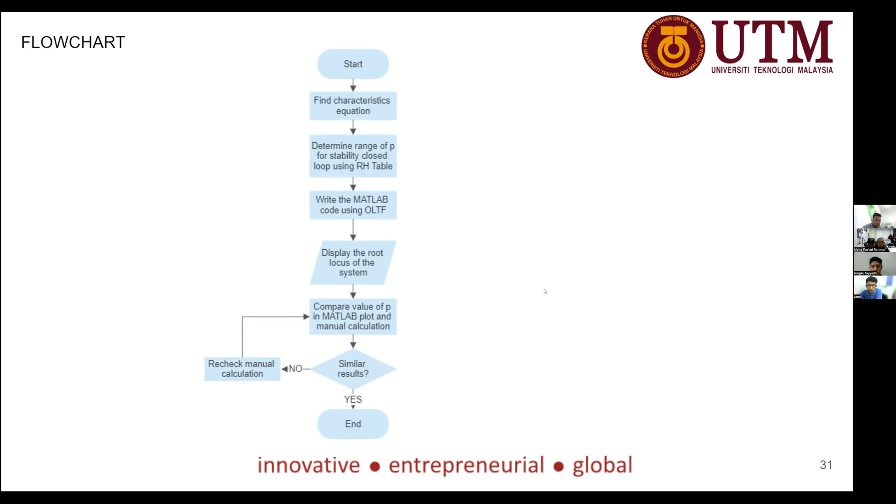For findings, the P value cannot exceed 10 because when the root locus is at the right half plane it will be unstable. The RH table can be used to calculate the range of stability. For suggestion, we must make sure all the poles are located within the left half plane of the complex plane. For improvement, we need to consider adding a gain limit to prevent excessive amplification to the right half plane.

For the last question, CP 7.10, we are given a system represented in state variable form, with the state space equation. The question asks us to determine the characteristic equation, find the value of K for when the system is stable, and then develop an M-file to plot the root locus.

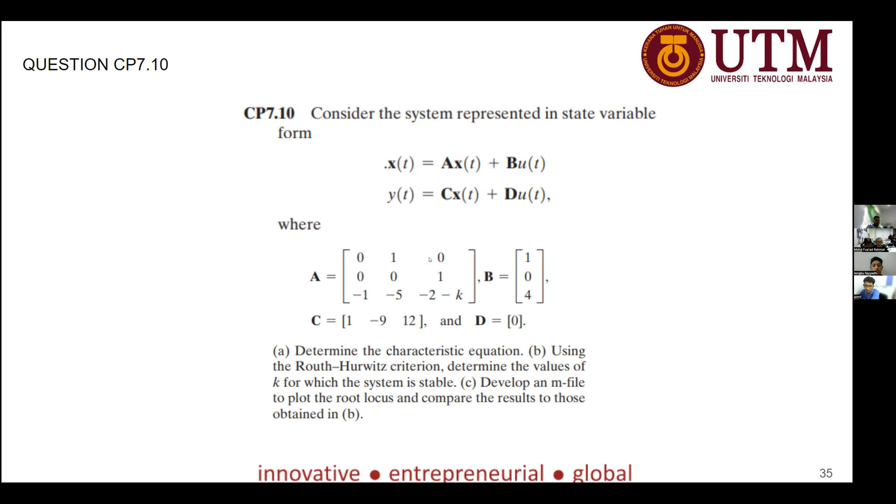This is how we solve this problem. First, we determine the characteristic equation from the given state space function, then find the range of K using the RH table, and write MATLAB code in an M-file to plot the root locus. Run the file and it will display the root locus, compare the manually calculated K with the MATLAB plot, and if it is similar, the objective is completed; if not, we recheck the manual calculation for error.

So this is the manual calculation. As you can see here, all the state space equations are here. By multiplying S with the identity matrix, we acquire SI. Then to find the characteristic equation, we find the determinant of SI minus A, and we got S cubed plus (2+K) S squared plus 5S plus 1, using the RH table.

SI? What SI? SI, S times the identity matrix. Oh.

Okay, then for finding the range of K, we see that K must be greater than -1.8 and also K must be greater than -2. So we conclude that the system stays stable for any value of K greater than 0.

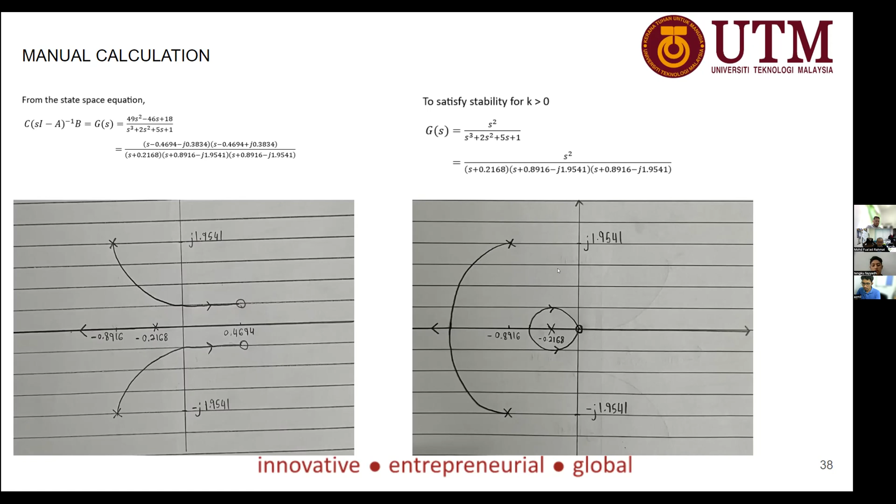So the observation is that in version 1, the root locus did not satisfy the range of K that we acquired, because as K increases, the system's root locus will move toward the right half plane, making it unstable, while version 2 satisfies the stability range.

Both versions have 3 finite poles and 2 finite zeros. Our findings are that in version 2, the critical K value is 0.101. Some suggestions for this question are that rather than sketching it, it is better to use plotting software.